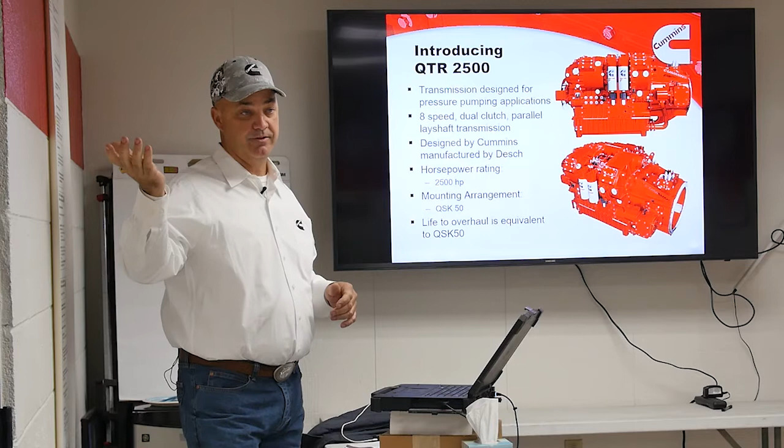They've also built a rebuild center in Dallas, right across the street from our rebuild center. So as we get more of these in the field and they come up for rebuild, they'll be rebuilt right there in Dallas, just like our engines.

Right now it's rated for 2,500 horsepower, hence the name QTR2500. The mounting arrangement is designed right now to be mounted on the QSK50 only. We're working on mating it to MTU—we've got a lot of demand to put it on an MTU to replace some competitive transmissions. We're also working to get it onto a QSK60 at 3,000 horsepower. Life to overhaul is equivalent to the engine for this transmission.

So some features of the transmission: first, there's an external disc brake. Some transmissions have an internal brake—if you have a brake issue, you've got to disassemble the transmission to fix it. Ours is external, so it's easily serviceable. The brake is not there to bring the transmission and the engine to a halt.

It's there to hold the pump. The brake will not hold the engine. If you put the transmission into gear with the brake on, it'll turn right through that brake and smoke it. The way the controls are set, if you go to put it in gear, it releases the brake, but if there was a problem, the brake won't hold it. It's just there—it's a parking brake, like the hand brake in your car.

Another feature is a barring device on the back of the transmission, similar to the barring device on our engines. It's there to turn the transmission only—it won't turn the engine, it'll only turn the output shaft of the transmission. That's for the pump guys, so when they need to service their pump, they can rotate that barring device to turn the pump for valves and seats, rather than using a big pry bar in the driveline like they have been.

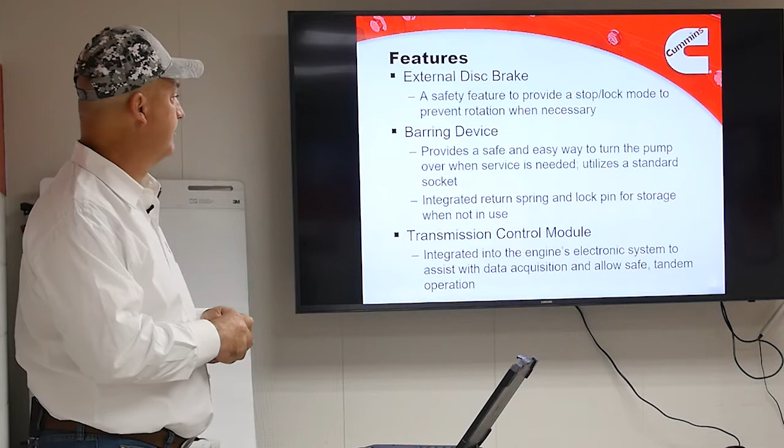And it's just like the one on the engine—it's got the little locking pin. You pull the pin out, shove it in, turn it, and pop it out to disengage it.

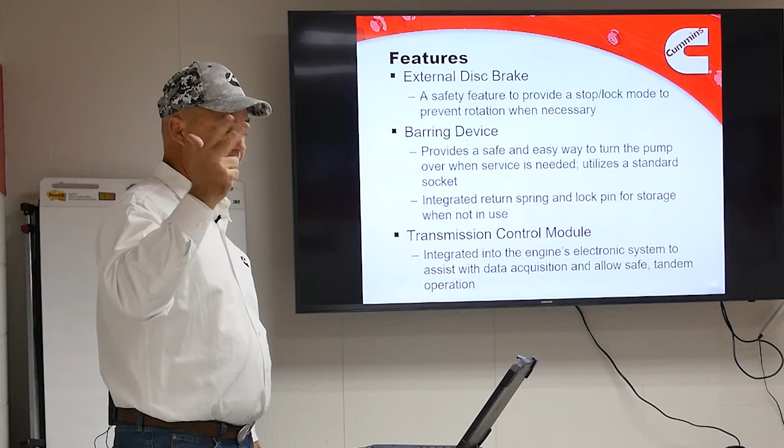The transmission has its own control module. That control module does talk to the engine over the J1939 data link, but it's its own independent device. It takes inputs from the frac rig for desired gear and desired throttle, and it talks to the engine ECM, telling it how much throttle it wants, and the engine throttles according to that.

Data on it: 2,500 horsepower. There are 8 forward gears in the transmission plus a test of pressure system gear. There's no reverse in the transmission, only forward gears. It has the same warranty as the engine: 2 years, 2,000 hours, unlimited in the first year.

It's a dual clutch transmission, no torque converter. It's a manual transmission, manual gearbox, but it's all shifted automatically. The transmission weighs about 7,300 pounds, and it uses the same oil as the engine does, so same fluid—you don't have to have a separate fluid for it.

Gears, gear ratios—put that up there just to show the tops. We'll talk a lot more about tops as we get on, but notice all the forward gears have a real nice even split, real close ratios, so we can shift gears under power and keep the engine in its torque curve, with real smooth even shifts. And then the tops gear is a very, very low gear, and we'll talk more about what it does in a minute.

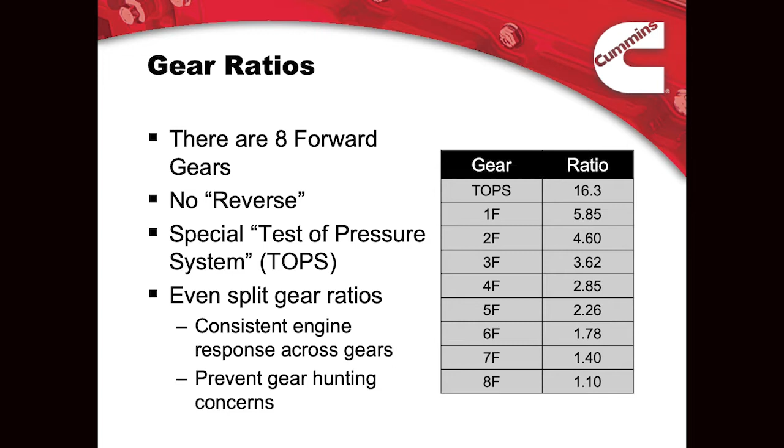Transmission data plate: there's 3 locations on the transmission where the data plate could be, because we like to keep things interesting. The original idea was to put it up there, then they decided to put it back there, and finally on the back. So that back position is where you should see most of them, but on some of the earlier ones you'll see it up there on the front.

The transmission data plate—on the early versions it's the Desch data plate, on the later versions it's a Cummins data plate, but it's got the transmission serial number. The transmission serial number is just like any other Cummins serial number: it's an 8-digit number, but it starts with 009 and then everything else. So it's a DBU serial number.

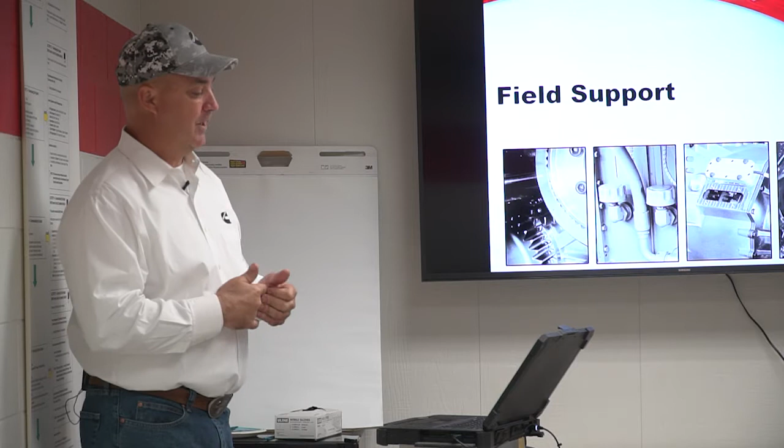Okay, we'll talk about field support. There's a lot of money tied up in development of this transmission, and this is very high on the radar from upper management. This project will succeed, it has to succeed. And in order for it to succeed, the one thing we need is help out in the field. We need you guys out there.

It was easy at first when we had one out in the field for me and my team to go out and support, or the engineering guys, but now that we've got more, it's too much, so we need more guys. The purpose of today is—this is not a full-on certification; you're not going to be a certified transmission technician at the end of the day. I'm just going to try to give you guys enough knowledge so you can plug into it with your computer, communicate with it, read fault codes, see operating parameters on the laptop, and know what the transmission is trying to do, what it's telling you.

And then also basic troubleshooting, so you know where sensors are, you know where pressure valves are, and you can change parts and pieces if you need to. And then also if you're out troubleshooting them, you know what to look for. So if we ask you, hey, you need to go look for this pressure relief valve, you've got an idea where it is, and you can feed back information to us so we can remotely help you keep them going.

For right now, the only repairs that are going to be made to the transmission are external repairs—so oil leaks, failed sensors, failed valves, stuff like that. If we have a part break inside the transmission, inside the gearbox, we're going to swap the whole transmission. We've got 100 of them sitting in Arlington. We've got plenty of spares.

The only exception right now for this is the clutch, and we are going to start doing clutch work in the field.

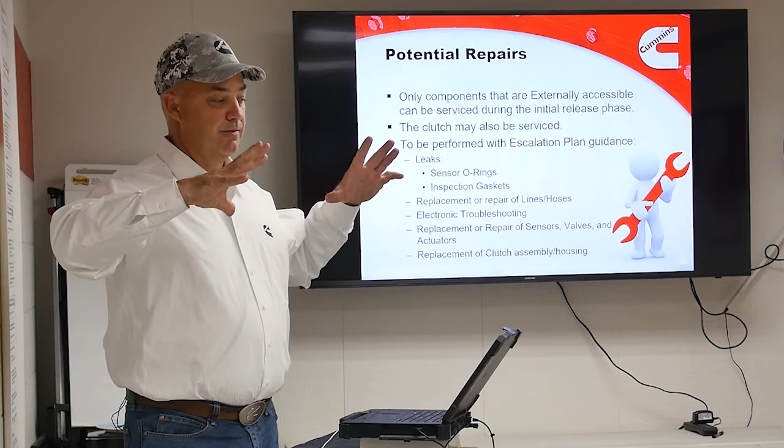It's too much of a job to do out on location, so when we say field, we mean a shop. If we have a clutch failure, we'll bring it to a shop like this, pull the transmission out, and change the clutch. We'll either change just the clutch assembly itself or the entire clutch housing, depending on what's quicker, easier, and what it needs.

There are no special tools needed to work on it until we get into the clutch. The only thing is pressure gauges to check hydraulic pressure in the transmission. The oil pressure in the transmission is 500 to 600 psi, so you don't want to use your PB350 or a 0 to 100 psi gauge. We need higher pressure gauges, but we'll talk about that later.

Parts are in stock here in Odessa—oil filters, O-rings, breathers, position sensors, all that stuff we have in Odessa. I have a parts list made up and I'll email that to you guys. So everything we can change, we have in stock, and it'll have a part number and description for you.

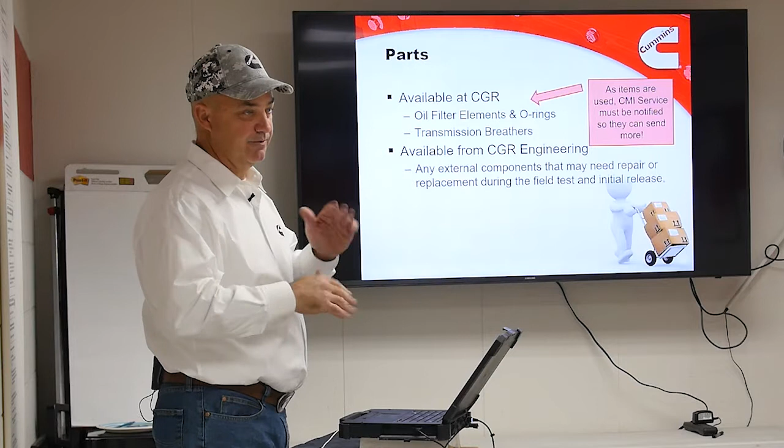It's not on QuickServe yet, it's being put on QuickServe. But since it's such a small number of parts, it's really easy to keep track of. Any parts that you change, we need to know about it and we need the parts back. It's all infant care stuff, so even if there's a cut O-ring, we're probably going to want that O-ring back to try to figure out what happened to it.

On QuickServe Online there's a maintenance, troubleshooting, and repair manual, and there are wiring diagrams—we'll talk about how to get to that later. For electronic service tools, this is the PuTTY software on your laptop. Before you guys leave today, we'll get all your laptops set up, you'll plug into that transmission and go through everything, and I'll show you how it works.

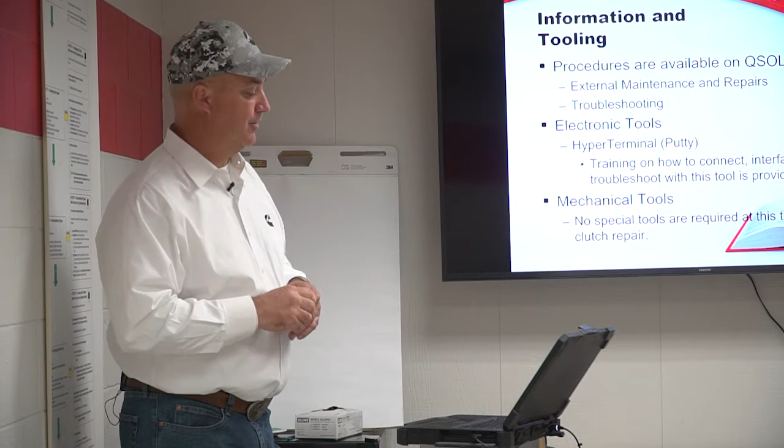There's a communication cable that's needed, part number W0271. You guys have two of them here in Odessa. Waylon keeps them in his office, so if you need to go work on a transmission, you have to get that from him.

Calibrations are done through a different program, and for right now we're going to leave that till later. We're not going to do any calibrations in the field yet.

All right, now we'll start getting into the parts and pieces. Transmission housings: the gearbox is made up of four housings bolted together externally, with lots of bolts—hundreds of bolts. When we go out there and look at it, there's an incredible amount of bolts holding this thing together. All the housings and seals are sealed with anaerobic sealant and O-rings for oil passages. There are no gaskets—the only gasket on this transmission is the oil pan gasket.

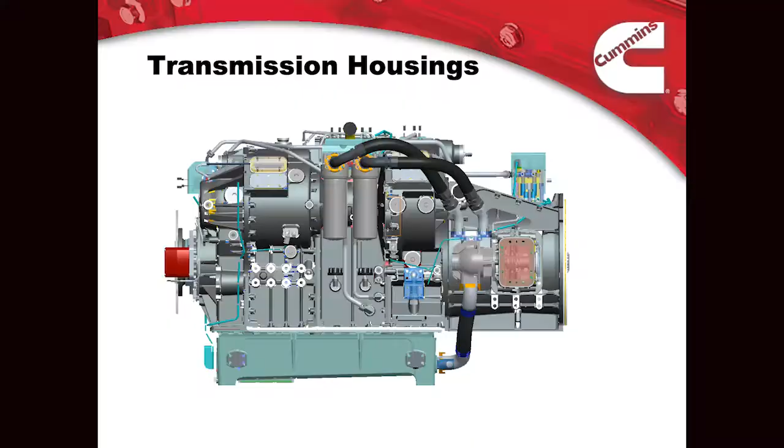The clutch housing is a separate housing that bolts on the front. As the name implies, that's where the clutch lives, but there are also two PTOs that drive out of the clutch housing. Terminology for all this stuff still isn't decided, so right now we're going by the drawing numbers—the clutch housing is H99. So if you talk to engineering and they're trying to get you to look at something, they're going to tell you to look at the H99 housing. That's the clutch housing.

The next housing going back from that is the tops housing. Going back from that is the filter housing, H72. The next one back is H73, the fill housing—that's where the oil fill cap is up on top, hence the name fill housing. And then the back housing is the output housing.

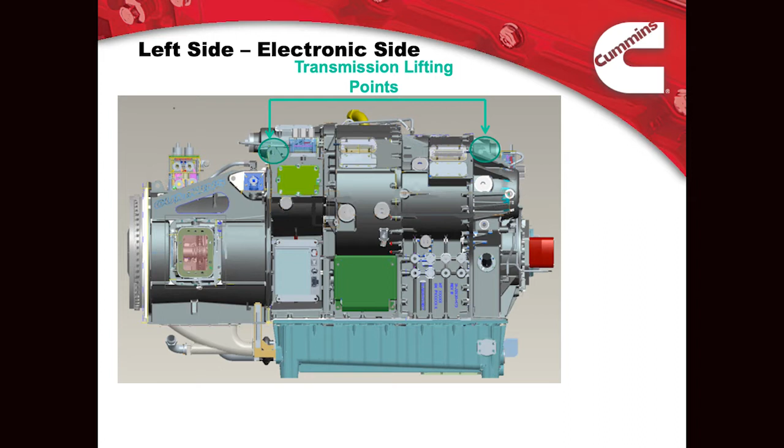Okay, looking at the left side of the transmission: there are four lifting points on the transmission, two on each side, and you can use the same fixture that you use for the QSK50s and 60s—it'll clamp right onto this thing and pick it up. For mounting locations, there's one on each side. This is where the cradle that supports the transmission bolts to the transmission, and from there it bolts down to the frame of the rig.

Sight glass: there's no dipstick on the oil pan, there's a sight glass instead. The sight glass has four different locations, one on each corner of the oil pan. Our standard is on the left side rear, but depending on the customer, they might move it around to make it more accessible. The transmission control module, TCM, is mounted on the left side.

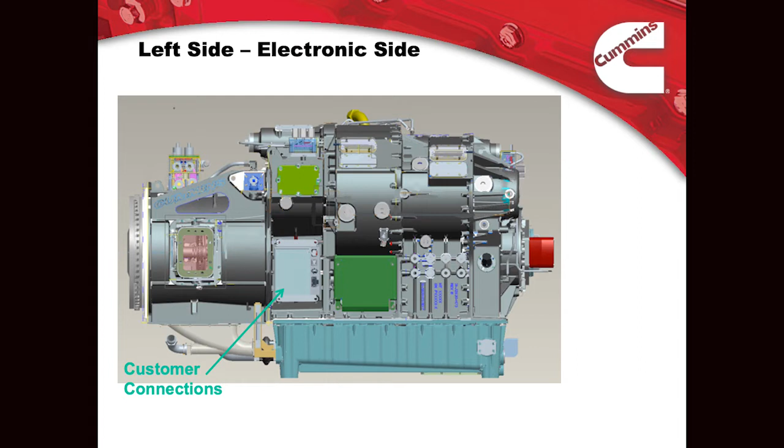And then the customer connections. This is where the customer lands their power and communication and everything else, and this is also where you will connect your laptop. Both of these are pretty easy to get to on every application I've seen so far, other than one up in Canada. You don't have to worry about that.

Okay, back side of the transmission. The only thing back there really worth talking about is the brake. It is a twin disc, or twin caliper disc brake right now. They are looking into going with a single caliper.

There's the barring device on the right bank side of the transmission. The oil drain plug is on the bottom of the pan at the rear. And then there's 2 oil heaters. Those come standard in the transmission, every transmission has them. We don't connect them, the OEM connects them, and those connect to the engine coolant.

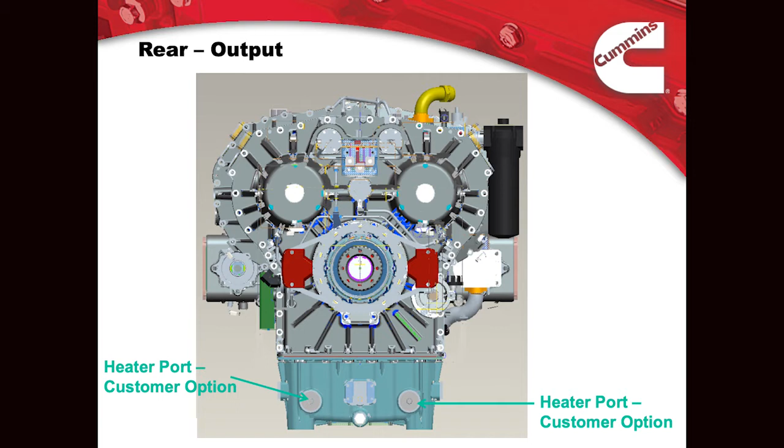Okay, the right-hand side, customer oil connections. So oil out of the transmission to the cooler comes out of that big pipe at the top, goes through the cooler, and returns to the clutch housing and dumps at the pan up there in the front.

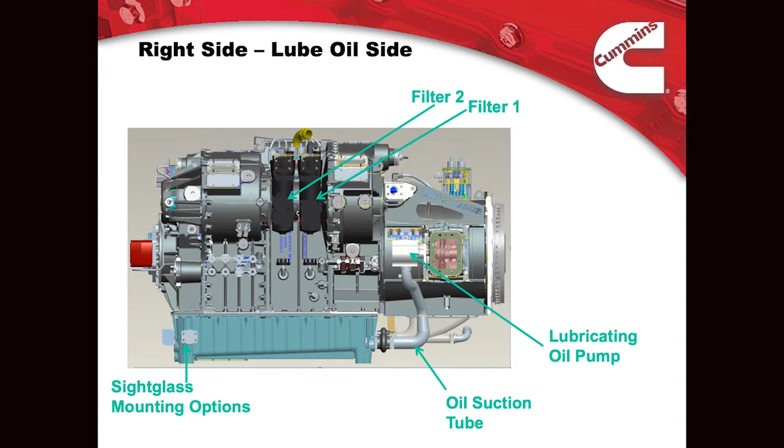Oil filters. It's got 2 oil filters. These filters are high pressure, so they are gear pump pressure, 500 to 600 psi in those filters. So special care when you change filters, and obviously you don't want to try to take one off while it's running.

2 breathers on the right side of the transmission, right below the oil filters. These are a serviceable item, we have them in stock. And then the mounting feet on that side.

Okay, and then looking at it from the front, there's 2 power takeoffs. The power takeoff on the left side is the customer mounting PTO. That's where the customer will mount their hydraulic pump to drive their fans or whatever they need to on the unit. And on the right hand side is where our oil pump is. Each PTO is capable of 150 horsepower load, so they can pull a full 150 horsepower off the left side. We're pulling 50 for our pump, so they've only got 100 horsepower left on the right hand side.

The pumps mount onto the PTO. It's a dry mount, so it's not a lubricated spline. There's no gasket, there's nothing in there, and we have seen some indications of wear on some of the early ones. So that might be something we're asking you guys to do on some of these first few, is to go out and pull those pumps back, grease the splines, put them back on. We'll talk about that when we get out there. The pump is light, it's real easy to get off, it's not a horrible job. And then the input shaft goes into the flywheel.

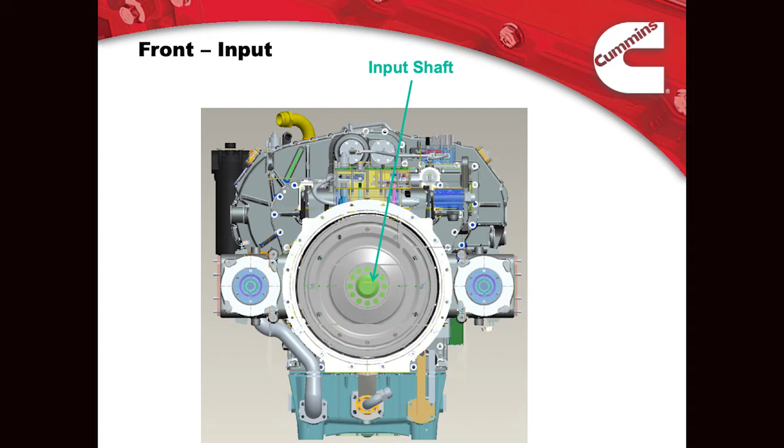Okay, manifolds, let's talk about the manifolds. This is a hydraulic manifold. This is where all the oil gets distributed in the transmission, through the transmission. All the actuators, everything happens through all these manifolds. There's 8 of them. We'll go over them real quick on here, and then we'll go look at them out on the transmission in a bit.

So the first one is the clutch manifold. It lives up on the clutch housing, bolts right up on the top of the clutch housing. All the valves on it - there's 2 valves, the 1 and 2 there, that's clutch cooling. Big valves, high volume of oil, so we push a lot of oil through the clutch when we're engaging it to try to keep it cool. It's going to get really hot really quick, so we'll pour a lot of oil through there.

Clutch pressure, clutch 1, clutch 1A and 1B - this is the actual clutch engagement pressure. The clutch is actuated hydraulically, so this is the oil pressure that's actually engaging the clutch. So if one of those pressure sensors fails, you will get a fault code for it, but it will continue to operate because it's got the other sensor.

Dump valves. So we actuate the clutch with oil, the oil stays in the clutch to keep it actuated. When we want to release the clutch, we need to release it really fast - we don't want it to drag, we don't want it to slip. So that's what those dump valves do, they open up and pour the oil, and it drops right straight back into the sump. Clutch pressure sensors, I already talked about, those are redundant. And then these are the actual actuators - these are what turn on to pour oil to the clutch to engage it. Okay, the next one is the lubricating oil filter manifold.

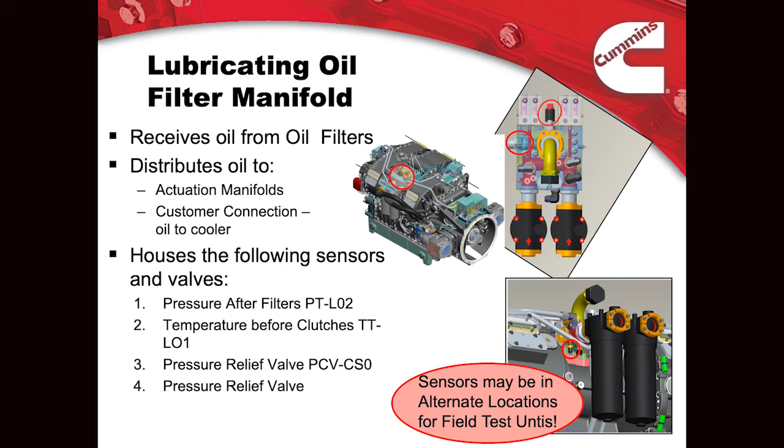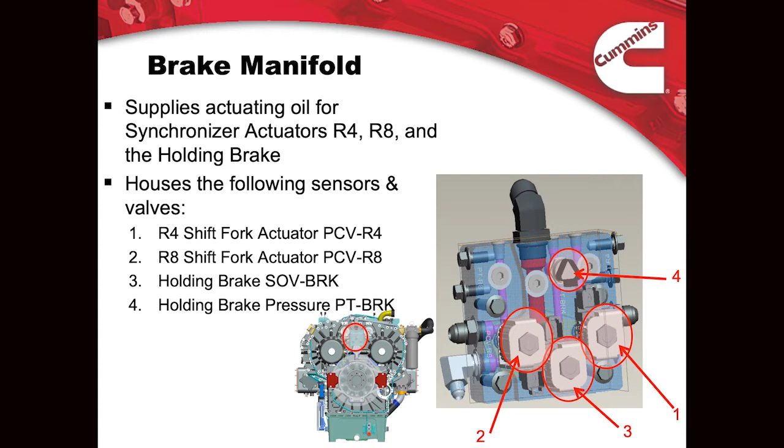Brake manifold goes on the back right above the brake. It's got 2 more shift fork actuators, and then it's also got, it controls the oil to the brake. Tops manifold sets on top of the tops housing. 2 more shift fork actuators, and then the tops shift fork actuator.

Lubricating oil pump manifold, it sets on top of the oil pump. Pretty much the only reason that's there is the oil pump has 1 single outlet. This manifold divides that up into 2 outlets, a hose connected to each one going to each filter.

Relief manifold. So this is where the oil comes out of the cooler, the customer transmission oil cooler, dumps back into the transmission.

Okay, oil pan. Again, bolts up to the bottom. It has a gasket, pretty much the only gasket in there. And it's got 2 heaters in it. Every transmission's got those heaters. And there's also a lubricating oil temperature and level sensor on the back of the oil pan towards the bottom.

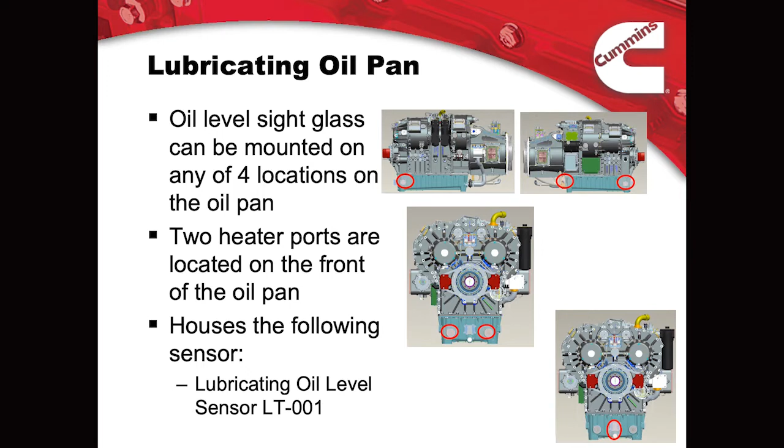We look at oil pressure. We log a lot of faults for our oil temperature. We'll talk about that. We'll look at that on the computer. And also oil level. It is an actual 80, 90, 50, whatever percent oil is what it's showing. And it will shut it down for oil level.

Talk about some of the sensors, speed sensors. On the right side of the transmission towards the rear, that's output shaft speed. The right hand side of the transmission to the front, that's the right hand shaft speed. The other side of the transmission is the left hand shaft. There's 3 shafts in the transmission. We'll talk about that later.

And then pressure sensors and temperature sensors up on the header. Some of these sensors will move around a little bit from early transmissions on into production. So what you run into in the field may not be exactly like this, but the harnesses are marked really well, and all the manifolds are stamped really well. Everything that goes is stamped in there. So it's pretty easy to trace.

Shift fork position sensors. So there's 5 shift fork position sensors. We're going to spend a lot of time talking about these. We have had some problems with these. And there's some confusion as to where they go and what they do.

So the right-hand side of the transmission, the shift fork position sensor at the front is R1, R2, and that is the shift fork and the synchronizer. So when we refer to a synchronizer or a shift fork, it's R1 or R2, 3, 4, 5, 6, 7, and 8. 3 and 4 are on the rear, 5, 6, 7, 8 are on the other side, and they're all 3, 4, 5, 6, 7, 8 are all front to back. 1 and 2 is backwards. So 1 is the back and 2 is the front. So that can be confusing. It'll make more sense when we look at it on the computer.

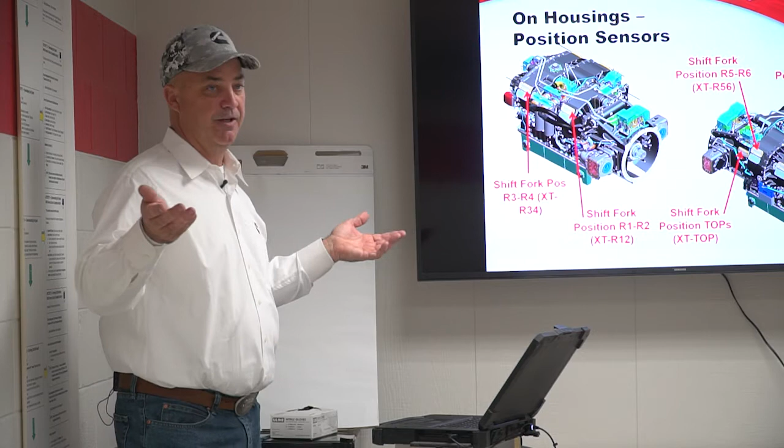The right-hand side of the transmission, when the shift forks are to the back, that'll read minus. If they're all the way to the back, they'll read minus 100. All the way to the front, positive 100. It'll be the opposite on the other side. There is a little bit of over travel, so when we engage the shift forks, they push all the way to the back to 100, and then they'll relax a little bit. And their actual holding position will be 97 or minus 97.

So when you look at it on the computer, that's what you want to see: minus 97 or 97, depending on where it is. And if it's not there, that's telling you something. We'll talk more about that later on. You can calibrate them, you can move them around, and tear a lot of things up if you're not careful. So we'll cover that a lot. That's the one thing about this.

When we talk more about the putty and the programming, it's not like INSITE where it's designed so you can't tear things up. You can tear this transmission up with putty if you go to the wrong screen and do the wrong thing. So I will spend a lot of time telling you what not to do as well as what you can do. So what we'll do now is we'll hop up, we'll run out there and take a walk around the transmission.

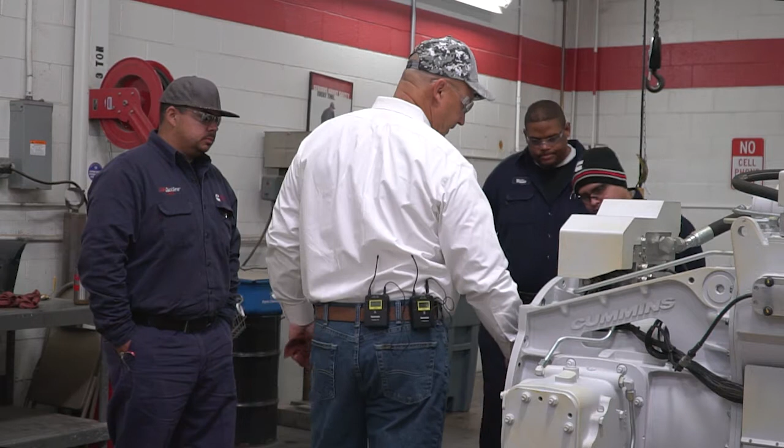We'll talk about all the things that we've looked at so far. So obviously on the input side, there's a coupler, a Geislinger coupler, which is pretty much the same that everybody else is using, the same that the competitive transmissions use. That bolts to the flywheel housing, and we simply just spline into that. Nothing at all tricky about it.

It is a wet housing, so there's an O-ring goes around here. All the oil from the cooler, the clutches, and everything else dumps into here and then drains back to the sump. So there's a lot going on in here. There's a lot of oil.

This is the input shaft here, connected to the crankshaft of the engine. Inside, this is the PTO drive gear, and there's a PTO idler gear on either side driving the outside PTOs, and then the clutch is further on in the back, both clutch packs.

So again, this is the H99 housing from here back. So this is a serviceable part. These bolts right here, you bolt all of that, swing this thing right off. There's a plate right here, cover plate.

This is where you go in to do clutch inspections. And this is part of the normal procedure that we'll probably be asking you guys to do on some of these. We're gonna be looking for signs of heat, signs of the clutch burning, and then we actually measure the gap in between clutch plates.

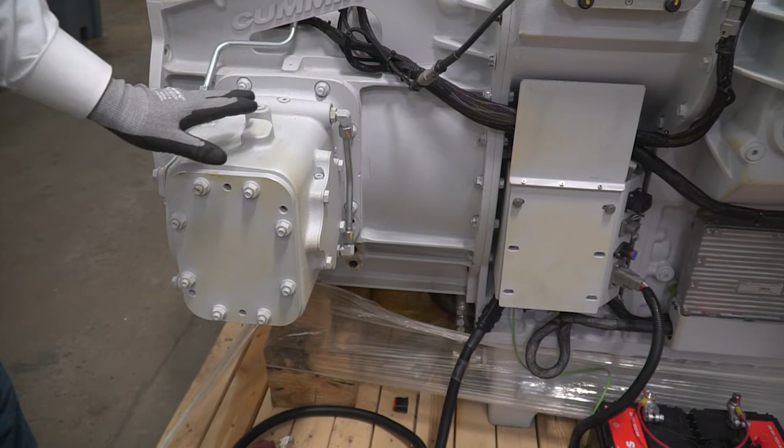This is the customer PTO pod. This is a PTO pod that the customer will connect their lube pumps to, or anything else that they need to drive off of it.

On the left side of the transmission, this is the customer connection point. Customer power and inputs for gear selection. Throttle comes into this bottom. There is a ground that connects to the inside, and then our service diagnostic tool connects into the harness right there.

J1939, you can plug into here, you can talk to the engine from here, you can talk to the transmission if we had that software. And then right behind that is the TCM, that's the transmission control module, the brains of the outfit right there.

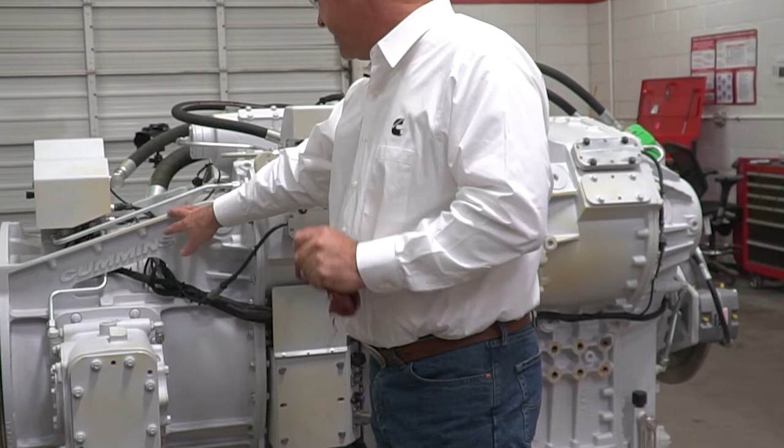So H99 clutch housing, H71 tops housing. The tops gear is in here. This is the tops position sensor. H72 housing, oil housing, filter housing.

This is R5, R6, shift fork position sensor. And there's an inspection plate here. You can pop this up and you can see the synchronizer in there.

This is something else that we will ask you guys to do at some point along the way for troubleshooting and also just for wear analysis as we see where we're going. R7, R8 shift fork position. The output shaft.

Are twin brake calipers. Brake manifold right here. There's the fill housing where they put the oil in. There's your oil level. The barring tool that we talked about right there. Pop that pin out, put it in there, turn it, just exactly like the engine barring tool.

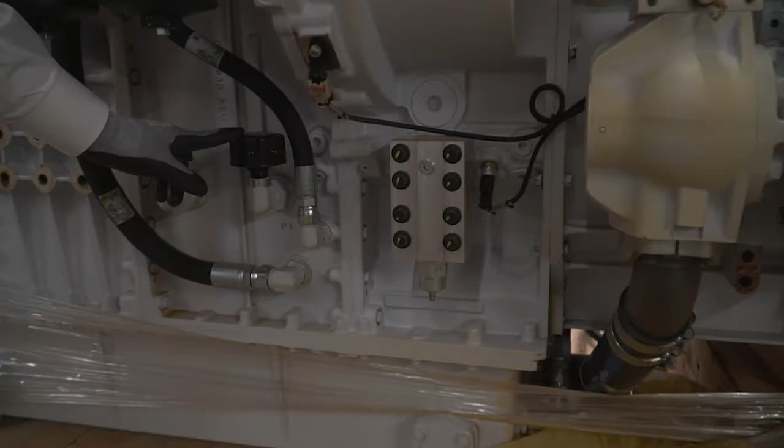R3, R4 shift fork position sensor. Output shaft speed sensor. Oil filters. Crankcase transmission breathers. R1, R2 shift fork position sensor.

This one is reversed, it reads back to front. All the other ones are front to back. So 1, 2, 3, 4, 5, 6, 7, 8. This is oil out to the transmission oil cooler. Oil goes through the cooler, returns back to the transmission through this fitting, dumps to the oil pan.

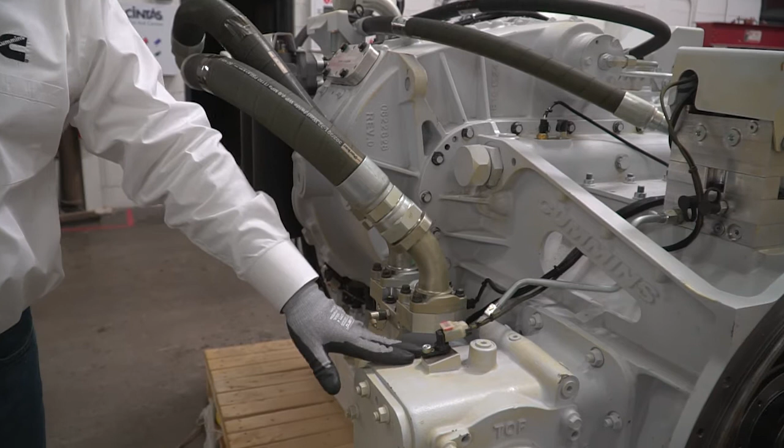This is our lube pump. It's driven off the right side PTO pod. This provides hydraulic pressure and lube oil pressure to the transmission. If there's a failure in here, we do stock these, you can just change this. Don't foresee anything happening there.

But again, this spline in here, it is a dry spline. We have seen problems with that. So there is a grease that we've identified that we're going to put on there, and we may need every couple of thousand hours to pull this pump off and grease that spline up.

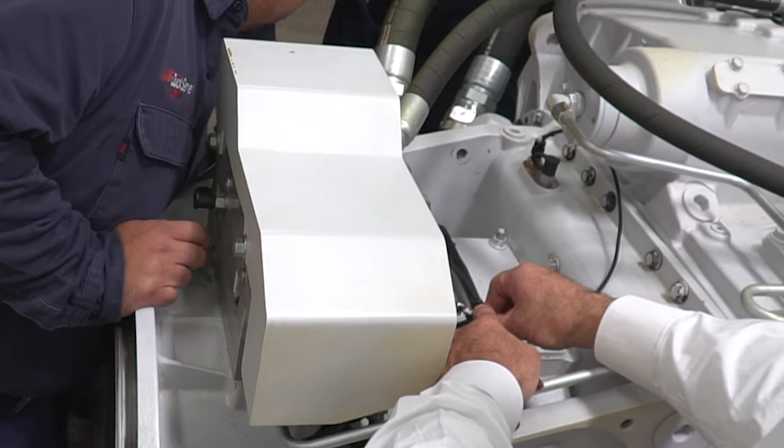These steel lines across the top, these are all your actuators. So this is the oil that's pushing the piston to drive a shift fork actuator in and out. Everything's done hydraulically. All the harnesses, every connector is marked. It's a good steel plate that's easy to read. Depending on who puts it together, it may or may not get painted over. If they mask them off, it's a real easy way to find it.

So we're going to look inside. We're going to talk a lot more about what's going on in what gear, where shift forks are, all that good stuff as we're going through gears.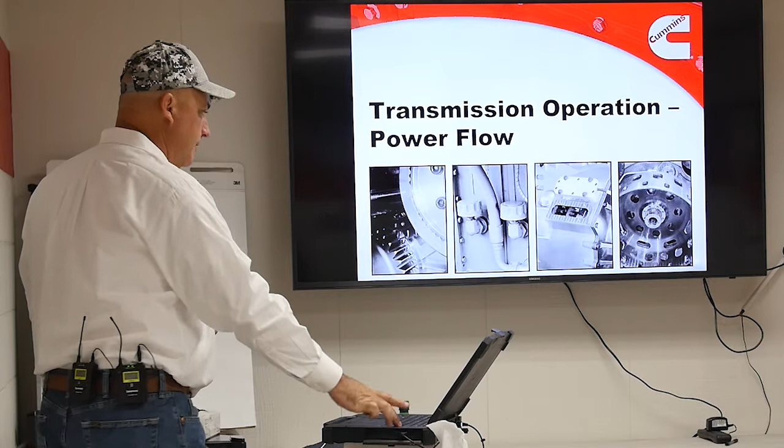And the other thing I got is this video. I took this video in a test cell with a customer a couple years back. I threw this in there just to give you a sense of what this thing sounds like. There's a lot of gear whine with this transmission. That's normal.

And also to see what it's like when it shifts. So this is a gear shift going from second gear to third gear with about 10,000 psi against the pump. If you've ever paid attention on a frac pad, you'll see some of these competitive engines, you can tell when they shift gears, you can hear the clunking and the banging, and you can see the trailer rocking back and forth. All that clunking, all that banging is hard on drive lines, it's hard on pumps.

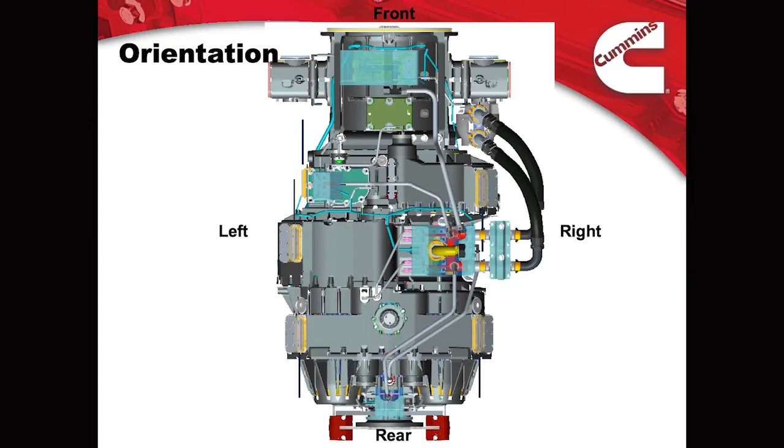So orientation, when we talk about the transmission, it's exactly the same as the way we talk about engines. If you're standing at the back of it, on the output side of the transmission, left is left, right is right, left bank, right bank, just exactly like the engine. And that's how I'll refer to everything, as left bank or right bank, because that's how I was raised and that's what makes sense to me.

Shafts - so it is a dual shaft transmission. There is one common shaft through the bottom, that's the input and the output, and then there's a lay shaft on either side of that. The input shaft receives the torque of the engine through a Geislinger coupling, we just saw that. It goes through the transmission, through the gears, comes out the backside, and powers the load.

Lay shafts - so parallel lay shafts, one on each side of the transmission. The left bank side of the transmission is the odd gears. The right bank side of the transmission is the even gears. The shafts aren't really one shaft all the way through, it's really two shafts split in the middle. On the left side, the odd gear side, it's split in the middle, and there's a bearing supporting the front of that one and the back of that one.

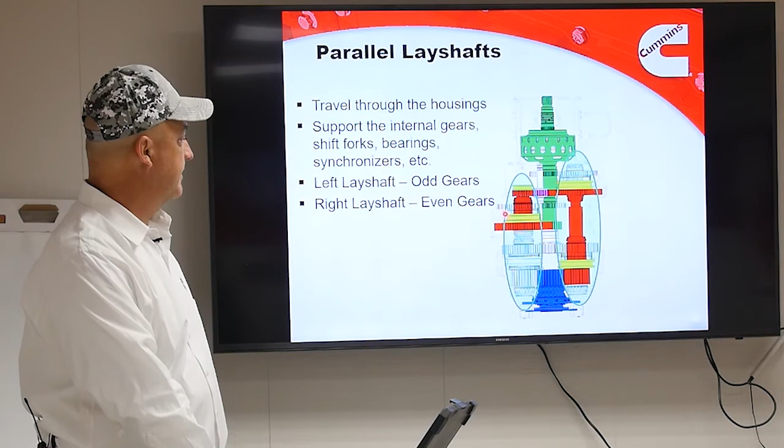This shaft is not connected internally. The only thing that connects this shaft is all the gears. The right bank side is split just like the other one is. The rear shaft is a hollow tube with splines on the inside, and the front shaft has splines on the outside, and the splines are inside of each other. So they are mechanically splined together. And all that will make more sense as we get further into this.

Dual clutch - you'll hear that a lot, dual clutch transmission. There's two clutches, referred to as K1 and K2. K1 is the big clutch drum that you see on the outside there. K1 drives the right bank side, K1 drives the even gears. K2 is the smaller clutch on the inside. K2 drives the left side, K2 drives the odd gears. So when we shift from an odd gear to an even gear, first gear to second gear, there's no gear changing that goes on. All we're doing is switching from K2 clutch to K1 clutch.

And it's an instantaneous change. Release one right as the other one grabs, so that's why you don't see the rocking and the banging. You saw that nice smooth shift, and it happens in half a second.

This is the same concept. I don't know if any of you guys watch Formula One racing, real fast paddle guys, that's the same concept. Or some of your newer passenger cars, Audis and Volkswagens, the DSG transmission.

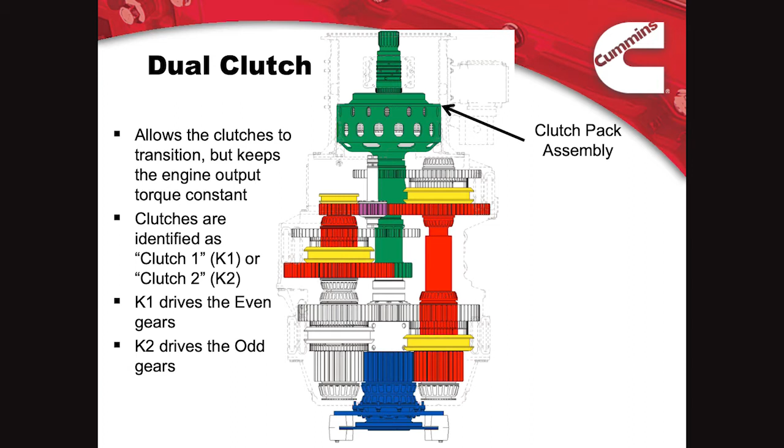It's the same design. The only difference is with them, they're pre-selecting gears up and down. They're looking at throttle, they're looking at everything, trying to figure out, you're in third, you're going to go to fourth, you want to go back to second. Whereas if we're in first, we're going to second next, right? We're not going to skip up, we're not going to go around. Everything is 1, 2, 3, 4, 4, 3, 2, 1.

So looking at the clutch with the housing off, the clutch drum, the big drum on the outside, that's your K1 clutch. The K2 clutch is inside on those splines. The clutch sitting out on the floor, same thing — the big one, that's K1, the smaller one, that's K2.

And then looking at it through that inspection window that I showed you guys on the front, this is the K1 clutch right here, so those are the K1 clutch discs. Looking through that hole into the K2 is the K2 clutch disc, and that's what they look like looking through the hole right there.

We'll go out and pull that cover off and look at it, because that's part of a maintenance procedure — to measure this gap in between these clutch discs. There's a specification, and we have a tool to do that. Shift fork synchronizers.

So this is when we talk about R1, R2, R3, R4. This is what we're talking about.

Looking through the little inspection window on the side of the transmission, this is the synchronizer inside of it. This bronze pad right here is what rides on this clutch fork or shift fork, and that rides right inside this ring, and that pushes this synchronizer ring up onto this spline or down onto this spline to engage that gear.

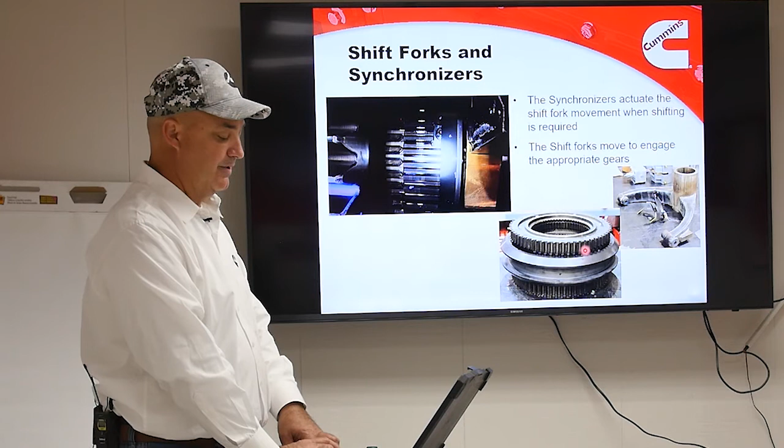So we'll start talking about what's going on when we're going into a gear. These drawings are really only half accurate, and the reason they're drawn like this is because it's showing us what this side is doing while we're going into first gear. It's not showing us what this side's doing when we're in first gear, because it's going to be different whether we're coming back into first from second, or if we were in third gear coming from fourth — that's going to be a different spot. I'll try to walk you through it without confusing it much more, but for right now we'll just look at it as it's drawn, and I'll explain more later.

So for first gear, both the shift forks are going to be to the rear. Actuators are going to push both shift forks to the rear, to the 97 position. We're going to engage K2 clutch, and that's first gear. So looking at it from the inside, this is R5, this is R6 gears — that's your first gear, that's fifth gear. There's your shift fork to the back.

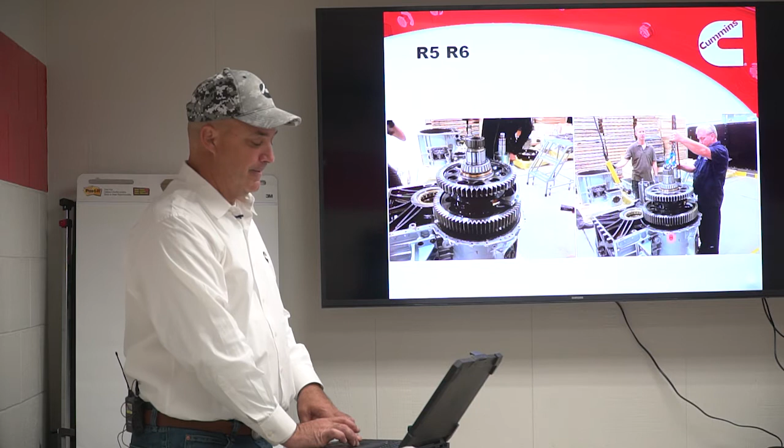And then when they come out of the transmission, you just hook a hoist onto them and they lift right straight out. They're just setting in there on bearings. Also just kind of notice as we go through this, the size of these gears — that's why this thing weighs 7,500 pounds. This is one of the reasons why we're not too worried about making internal repairs. This thing ain't gonna break.

So second gear — we're gonna shift from first gear to second gear. Really nothing is going to change in the transmission.

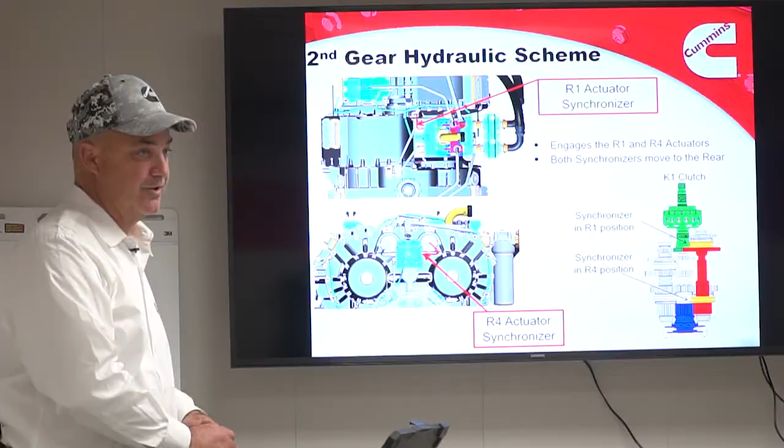Shift forks are going to be at the back. And then all we're going to do is switch from the K2 clutch to the K1 clutch, so we'll drive this other side. So first gear to second gear is nothing but a clutch swap. Nothing else happens in the transmission.

When you start the transmission up and it builds hydraulic pressure, the transmission goes to what it calls a home position. The home position is all 4 shift fork sensors to the back, ready for first gear. And the clutches are released, so this is neutral. So when you command neutral, and it says it's in neutral, the transmission is actually in a gear, but the clutches are just released. We don't really have a neutral position, we don't shift the transmission anywhere to neutral. We just release the clutch. And that's kind of important to remember, that home position.

So when we first started up, all 4 are going to move to the back, and that's first gear, ready for first gear. So these are to the back, and these will be to the back, and then both clutches are released. So then we'll energize the K2 clutch, which drives the left shaft, so that'll put the power through the left shaft. That's first gear. And then when we want to go to second gear, all it does is release the K2 clutch and engage the K1 clutch, literally almost at the same time, in the same instant. It just changes over from one to the other.

So when we go to third gear, it's going to start off in first gear, go through first gear, go through second gear, and then when it's in second gear, it's going to start to pre-select third gear. This is the R1 and R2 gear set - that's the R1 gear, that's the R2 gear set. You can see everything's splined or meshed. All these gears are always meshed together all the time.

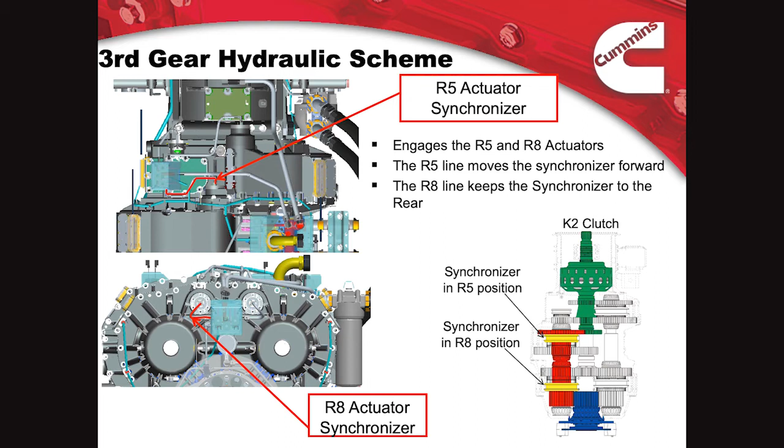So to go to third gear, we just went to the K2 clutch. We moved R5 to the forward position, then we engaged the K2 clutch. So all we do to go to fourth gear is now we want to drive the other side. We're going to move R1, R2 forward into the R2 position. So now it would be reading 97 if you're looking at it on putty. And then we're going to release K2 and engage K1.

So first through fourth gear: first gear, all the shift fork position sensors are back. Second gear, they're all back. Third gear, R5, R6 moves forward. Fourth gear, R1, R2 moves forward. And then it's just clutch swaps back and forth. This is pretty much everybody, that's what they're going to run through, first through fourth gear. I don't think anybody ever uses the gears higher than that, other than sometimes maybe when they're clearing out pipe.

So now to go to fifth gear, on this shift we're moving two shift forks. We're moving R5 and R6, which was up in R5, back to R6. And R7 and R8, which was back in R8, we're moving up to R7. So that takes a little bit longer, a lot more oil, a lot more stuff to move around, plus we're synchronizing two different gear sets. So this is a longer shift. Fourth to fifth is a longer shift than any of the other ones as well.

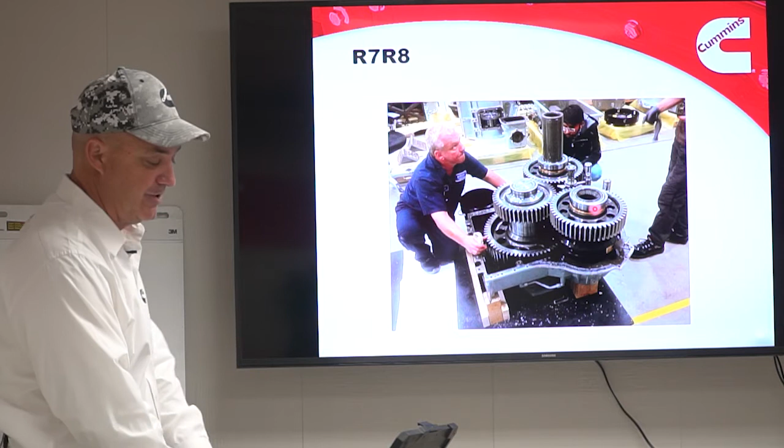And then the gears in the back, so R7 and R8 gears back there, shift fork position, the output shaft. And then you can see on the other side that tube, that shaft, the other one couples inside of it. Or these two shafts, the one that would go up here, they're not mated together, it's just a bearing right there. But again, big, beefy stuff.

6th gear is the same as 5th gear. We're just going back to the other side now. We're moving both shift fork positions, we're swapping clutches. Same thing on the other side.

Again, you'll notice all the gears are all meshed all the time. Shift forks right here. And then this right here, these are spray bars. Every gear's got one, two, three, or four spray bars, just like a piston cooling nozzle. All those gears, all those bearings, everything is flooded with oil all the time. It's a massive amount of oil that goes through this thing when it's running.

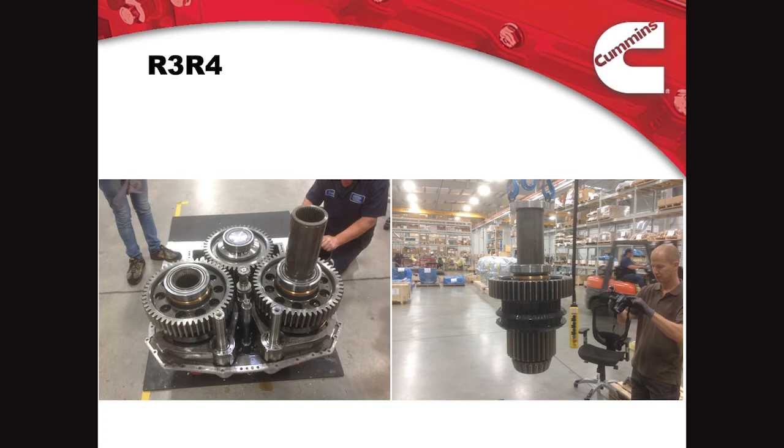7th gear, same thing, just popping back to the other side. But now we're just moving R5 back forward. So this would be a little bit faster shift than going into 5th gear was. And then the last one is 8th gear, same thing.

All right, so the next one is tops. We've talked a lot about tops, I've said tops 100 times, but I haven't told you what tops is. So tops is its own special gear. It's the gear that we use to pressurize the iron. So when they hook up all their stuff to the well, before they do anything, they always pressurize everything, make sure they don't have any leaks. And the normal procedure for that is that they want to pressurize, say, to 10,000 PSI.

The operator will put one transmission in gear and he'll wait until the pressure comes up. And then he'll go to neutral, like at 8,000 PSI. And then he'll go back into first gear and then back to neutral, and he'll neutral, first, bumping it until he gets up to whatever he wants, just 10,000 PSI. It takes a lot of time to do that. It's hard on the transmission, hard on the pump, hard on everything to do that. Neutral, first.

So what this does is this is an automatic pressure system. If they want to use this, the operator goes into his screen and finds the test to pressure screen. He selects that, inputs what he wants, say 10,000 PSI, and pushes start. Then the transmission does it all by itself. Using the K2 clutch, it engages this tops gear, this tops shift fork. And then it also puts R7 and R8 in neutral. So this is the only gear, the only time this transmission ever operates where any of these four shift forks are in a neutral position.

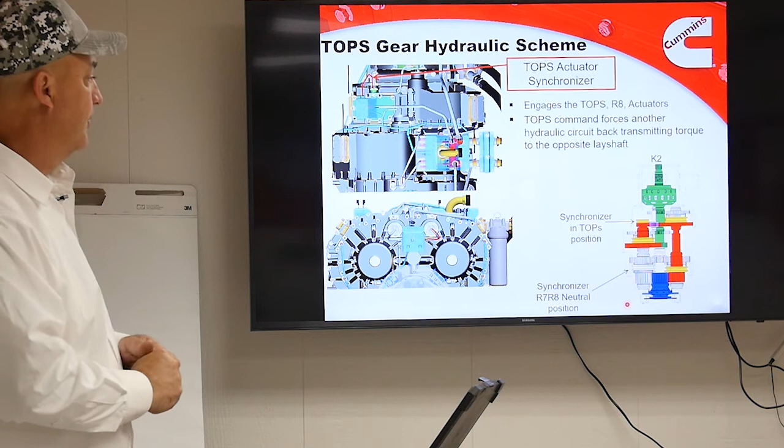So at that point, if you go out to one of these and they say it won't go into gear, and you plug your putty in and you see this R7, R8 is hanging out at 0 or 10 or 15, something like that, it's in neutral.

Probably what happened is they used the tops mode. Once they got done with the tops mode, for some reason that didn't go back into gear, so the transmission locked itself out. At that point, the only way you can get it to reset is to shut it down, power it down, and then start it back up. And when you start it back up, it'll drive everything back home.

I wanted to beat that one home. If you see R7, R8 in neutral position, that's probably what happened. It won't give a fault or anything like that, it just won't go into gear. Customer calls you, says it won't go into gear.

You can ask them, did you try to use tops? Yeah, we used the tops and it wouldn't go into gear. Okay, shut it off, start it back up, and it'll probably work.

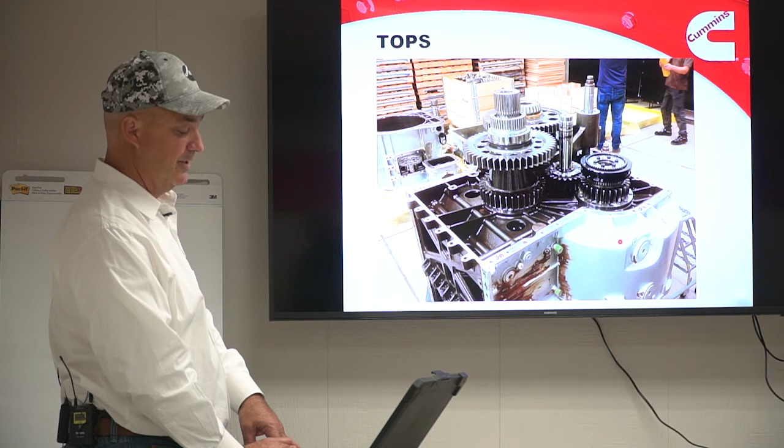So this is the top gear right here, drives it through an idler gear onto the other shaft. So when this is released, when this is in its neutral position, this is all just free spinning. And then when this engages, then it engages this gear through this idler, and then it drives this gear back in through here onto the other side.

That's where you get that 16-to-1 gear ratio. It's a really, really low ratio. When they do the test mode, the engine's at idle. They do it at idle, yeah.

We'll go over a little bit more of this in the operation part, but to enter the tops mode, the transmission has to be in neutral to start with. It won't go into tops if there's any output speed of the tail shaft. And normally we don't have any output tail shaft speed. A lot of your automatics, that output shaft's always turning unless you set the brake. This one, it won't. When it's in neutral, nothing's going to be turning out the back.

Once we get some wear on the clutches, the plates warp a little bit, we'll get a little bit of drag, and you might see some output shaft movement. So at that point, the tops won't engage.

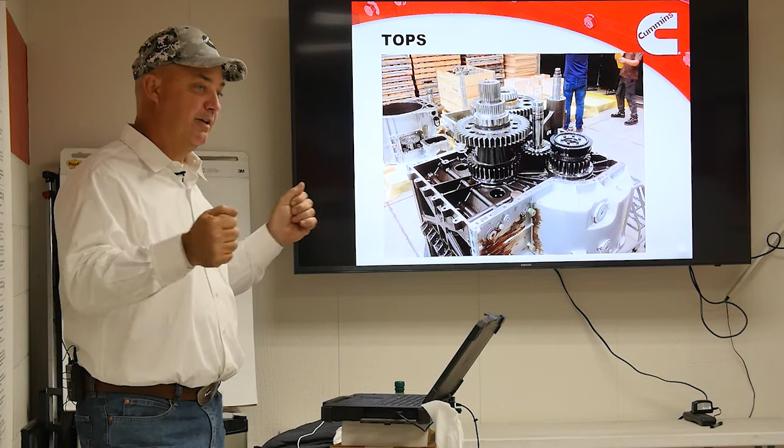So what we're trying to get everybody used to and all the controls is to go to neutral brake. For tops to work, they have to go to neutral brake first, set the brake, that stops everything from turning. Then it'll engage the tops, release the brake, and it all happens at idle. If they throttle it up, it's going to kick the transmission to neutral. It's all automatic. As soon as they push that test to pressure mode, they set their pressure, they push start, that's all they got to do. Everything else happens all by itself.

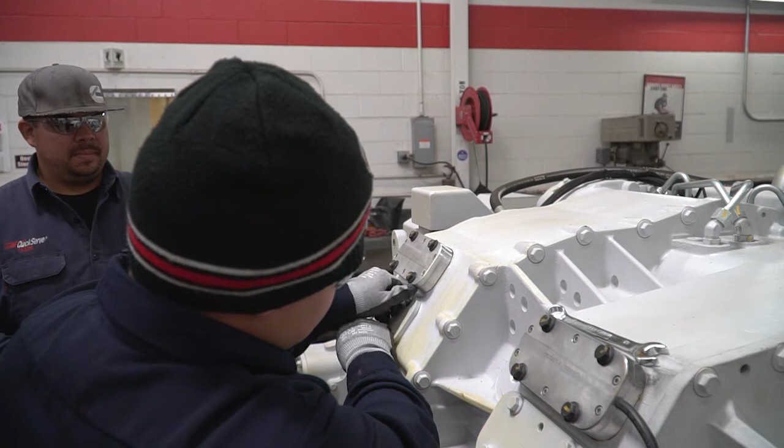All right guys, we're going to do a quick hands-on exercise. First pull the R5, R6 inspection plate off, then tell me what position that shift fork's in. Then we'll pull that sensor off, and then pull the clutch cover off and look at the clutch. So grab your wrenches, go to R5, R6, and pop that cover off.

That pops right off. That's a more or less reusable gasket, assuming you don't tear it up. Now if you look inside there, what position is that shift fork in right now? Yep, you're both right, it's at the rear. It's in the back. So that's 97, R5, R6 - that's in the R6 position right now.

Assuming that we engage the K2 clutch, and assuming this shift fork is also at the rear, that's first gear. Then we just swap to that side for second gear, move this shift fork up to here, and then engage the K2 clutch, and that's third gear.

That's what everything inside here should look like after it's got 10,000 hours. That's what it's going to look like. Things we might see are little clutch discs inside that synchronizer, and that's how it works - by smashing those clutch discs together and slowing everything down.

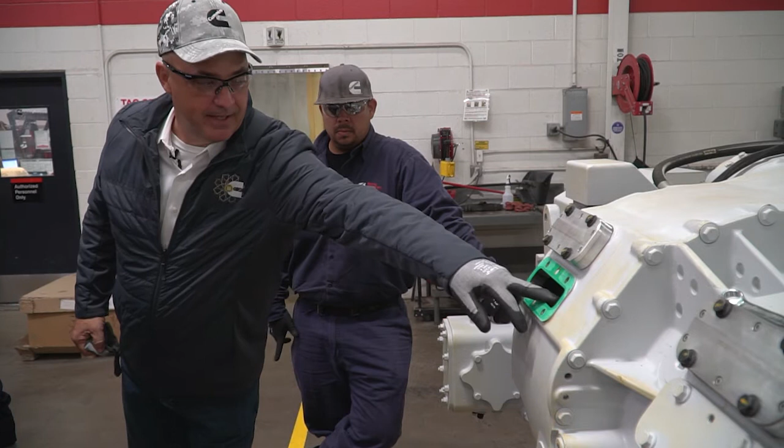If there's a problem with the shift fork holding that synchronizer up against the gear instead of being in the release position, it would overheat that, and you'd see signs of heat in there - they'd be turning blue and purple and all kinds of crazy colors like metal does when it gets hot. Same thing with that bronze pad right there - you'll see black, blue, all kinds of colors like that if it gets hot. That would be signs of a problem.

Okay, that's that. Go ahead, slap that back up. Just leave it kind of snug so the next guys don't have to fight with it. There is a torque spec for those bolts - it'll be in the literature I can share with you guys. I'd recommend you torque those to spec unless you're really good with your impact. On the prototype transmission we tested, we found that plate warped after a while from guys hammering it in with the impact, and then it leaked.

All right, so let's go ahead and pop that R5, R6 shift fork position sensor out.

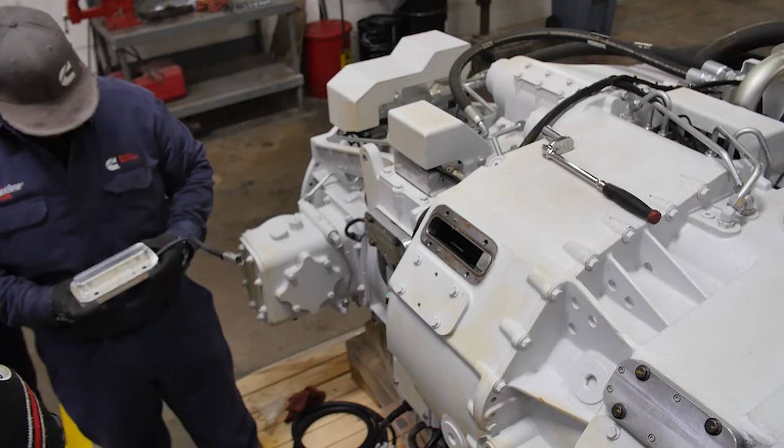So you see, obviously that's sealed with an O-ring, not a gasket. If you're going to go out and suspect you'll be doing something with these position sensors, take an O-ring with you. Those tend to swell up after a while, and then you never get them back in. You'll notice they are doweled, so they'll only go in one way - you can't get them in there backwards.

And that is one thing you can do to test a sensor. You can have it plugged in right here, and if you have a magnet, just run it up and down like that, and you'll see it moving.

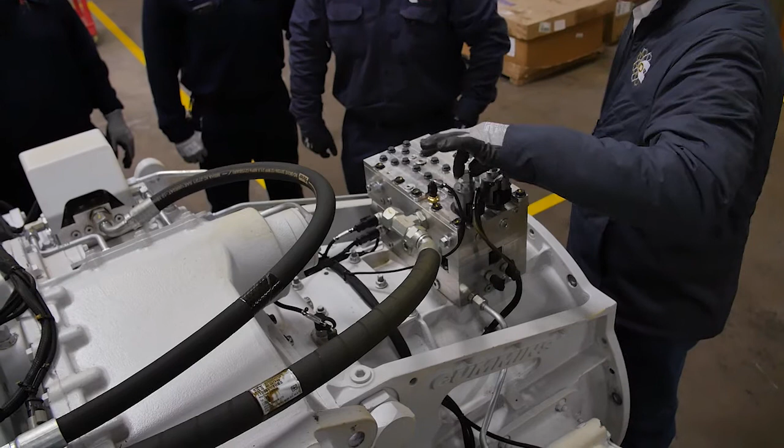I wanted to show you guys something real quick on these pressure control valves. These little nuts that hold these things on are really sensitive to torque - if you tighten these up really tight, the valve won't work correctly. So there is a torque spec. If you have an issue with a clutch valve that's not working, that might be one thing to check - is it one of these components, or some fat hand in there with a hammer tightening it up?

Okay, so next we'll pop this clutch inspection cover plate off and take a look at the clutch. I'll show you how to check that out.

Just looked at it. It's kind of a letdown, isn't it? You guys are ready to start swinging on things.

So we're looking at the clutch drum, right? This is your K1 clutch, the big one, the outside. And these are your K1 clutch discs. You can just see those around, and you can just move those. There is a specification and a tool.

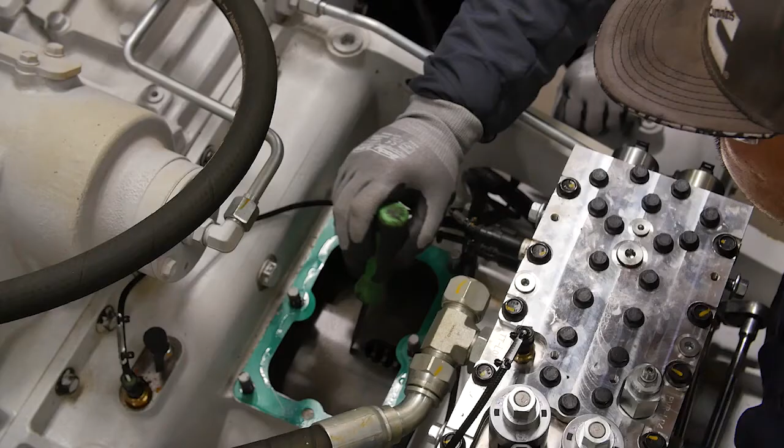It's just a piece of metal that we shove down in there to measure that distance. Is it go, no go? Yep, go, no go. And this is normal, this is what you ought to see. This is perfect. After a while, after some heat, they're not going to move around so much, but you should always be able to move them around. And if you ever get ones that are just absolutely stuck, you can't get those to move, your clutch is cooked.

The other thing that you'll see is these, they'll go from this nice little gray to black or blue, red, and all that stuff. Especially this inner drum, this is your K2, right? So this is the one that we start on. This is the one in starting where you get all the slipping.

But in order to inspect that K2 clutch, you're going to have to turn it. It'll turn pretty easy right at first, and it's luck of the draw, because both clutches are turning at the same time. But when it's installed, and this isn't going to turn because it's coupled into the engine, then you have a little better luck of getting the two clutches to turn independently. But that's all you have to do is keep turning until you get a window.

And then once you get that window come up, you can get the other clutch drum in through that window. Same thing we're going to look for is if you can move those clutch discs in and out. And again, if you're looking for signs of heat, it should look nice and gray like that. Shouldn't be black or red or purple.

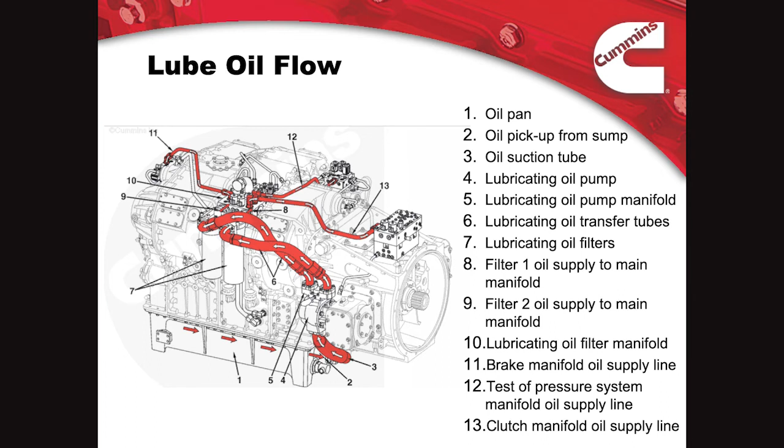Again, it's going to go through all these manifolds, it's going to split up a hundred thousand different ways. It's a mess, it's a lot to look at.

All the steel tubes that we looked at on the outside, that's your actuation lines, you see those. Lubricating oil flow is all internal through drillings. Clutch manifold, high volume, lots of oil goes through there. A lot of oil is needed to actuate those clutches and to cool those clutches. And then it also is the oil supply for the PTO gears.

So that's the gears inside the PTO pods. Remember that the actual drives themselves, it's dry. There's no oil out to the drives. Tops manifold, cooling oil. So this is oil that's going out inside the transmission and spraying oil on the gears inside, cooling oil. Handful of those outside too.

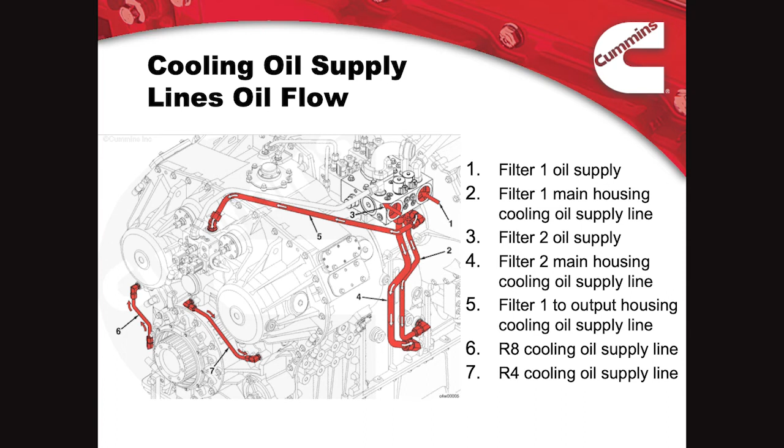Holding brake. So next we'll talk about normal operating parameters, procedures, things that you're going to see. Main system pressure, again, 500 to 600 psi, depending on the temperature of the oil and what it's doing. Lube oil, 6 to 12 at idle, 45 to 55 at rated speed.

Transmission temperature, these transmissions run a lot cooler than the competitive transmissions. There's no torque converter. There's none of that grinding and slipping that goes on in a regular automatic. So your normal transmission temperature will be 150, 160 degrees. Doesn't need near the oil cooler that the other transmissions do.

Operating techniques, this is for the operators out there. This transmission is different than the other ones. There's no starting out in fourth gear, there's no going from first gear to fifth gear. Everything has to happen sequentially. So if we want to start out, we have to start out in first gear, and then we have to shift first, second, third, fourth, all the way up to whatever we want.

So even if the operator selects fourth gear and throttles up, it's going to go to first gear, and then it's going to shift its way up until it gets to fourth gear. If he just selects fourth, it'll do that by himself, or he can sit there and push buttons all day long if he wants to. Same thing with shifting down, it has to sequentially come from fourth gear down to first gear if they want to go down that way.

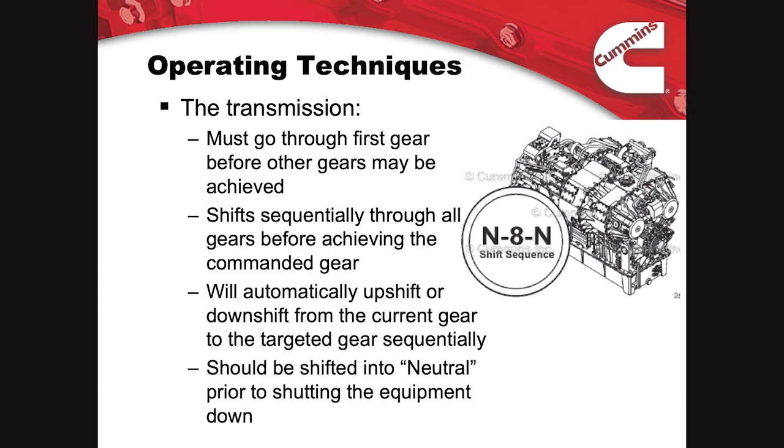We have a sheet right now that says at a certain well pressure, we need a certain RPM to engage the clutches, but it'll probably change next week or the week after as we get more tuning. So there is no neutral, okay? The transmission doesn't shift to neutral. We just release the clutches.

Again, if it shuts down when it's in gear, it's going to stay in the gear that it was in when it shut down. And another thing, if it's been sitting for a long time, or if you do some kind of service and you have lines off, even if you do an oil change and you have a chance of getting air into the system, it's a good thing.

Start it up and just bump it through the gears. Make sure you push all the air out of everything. Do that a couple times. Once you see everything's working fine, you can let it go back to service.

Again, go to neutral. If you've got your computer there, make sure everything goes back to home, minus 97 and 97.

Okay, maintenance stuff. It uses the same oil as you use in the engine, 1540 diesel oil. Pumpco is using 30 weight transmission oil. They're the only ones, and that's all done under an agreement.

We're doing weekly oil samples. Right now, we don't know how it's going to work or if it's going to work. So just a rule of thumb, it's 1540 engine oil for everybody else.

40 gallons, 65 gallons fill capacity. Oil level, checking oil level.

So there's no dipstick. There is the electric deal, you can watch it. But obviously the good way is with the sight glass. Quick and easy. With the engine running at idle, the oil level should be at about the parting line where the oil pan bolts up to the transmission, to the gearbox.

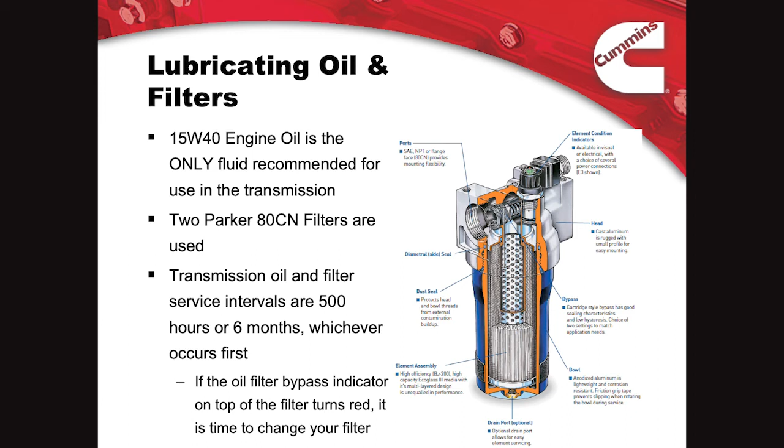We have seen on a few of them at fairly low hours start to give us oil pressure calls. It's because these filters were plugged up. Not sure yet if that's trash in the transmission or trash in the oil. And all the oil goes through those filters, so if I was going to go out on one of these, I'd carry a handful of filters with me. We're going to see a lot of filter plugging, I think.

All right, 2 breathers on the side of the transmission, we saw those. That's a maintenance item, change them every 6 months. Pretty much the only thing we notice is that those start to get plugged up. You'll start seeing the oil show low in the sight glass. It's because the transmission can't vent. Take those vents off, or take the oil fill cap off, and the oil comes right up. So every 6 months, change those.

Okay, so now we'll start talking about the putty, the fun stuff. So to talk to it, that's the cable you need. You saw it out there. That's the part number. We have those in stock in Arlington.

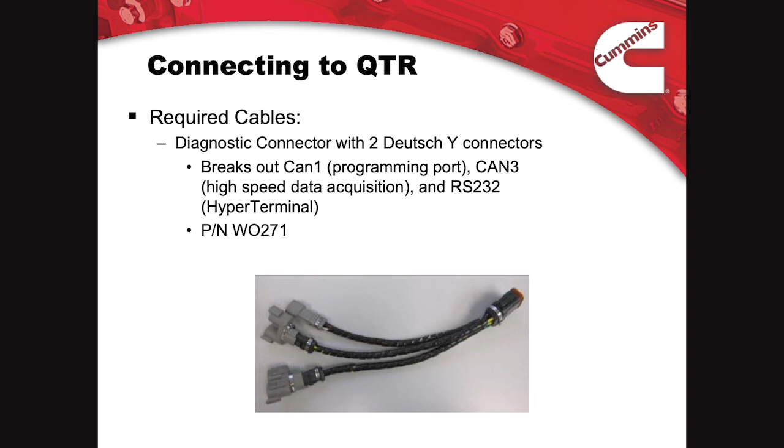I think it's $80. And like I said, Wayland's got a couple of them, but you guys ought to probably each get you one and keep it with you. So that way we can roll you out at midnight.

Connector location, we saw that on that front cover plate there, the bottom one where I'm plugged into it. That's where the harness plugs into it, or the rig harness. And then the cable that hangs down, that's the diagnostic.

To go to a screen, whichever one you want to look at, if you want to look at fault codes, you're going to push number 4, hit enter, and that'll take you to the fault screen. So the first screen is inputs, outputs, 1.

Here's all your pressures that we were talking about: clutch pressure, clutch 1 and 2 pressure, oil level transducer, 100%, it's full of oil, lube oil pressure before the filter, lube oil pressure after the filter, temperature before and after the clutch, sump temperature. Here's all your shift fork position sensors.

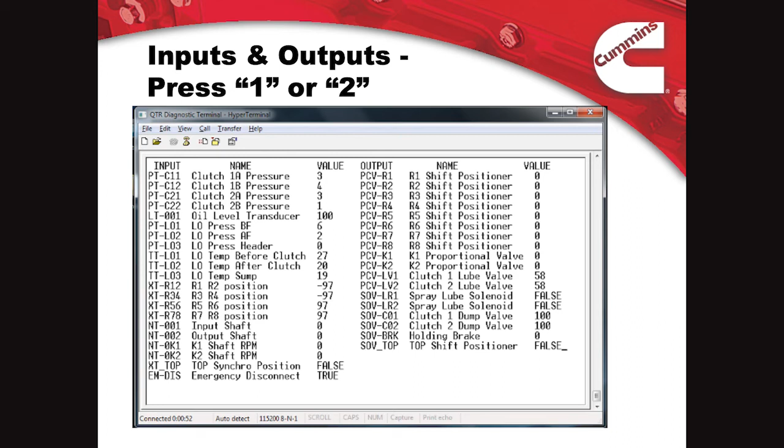What gear is this transmission in right now? Home position. If it was commanded in neutral, it would be in that position. The clutch is released, ready for first gear. Input shaft speed, output shaft speed, clutch speed.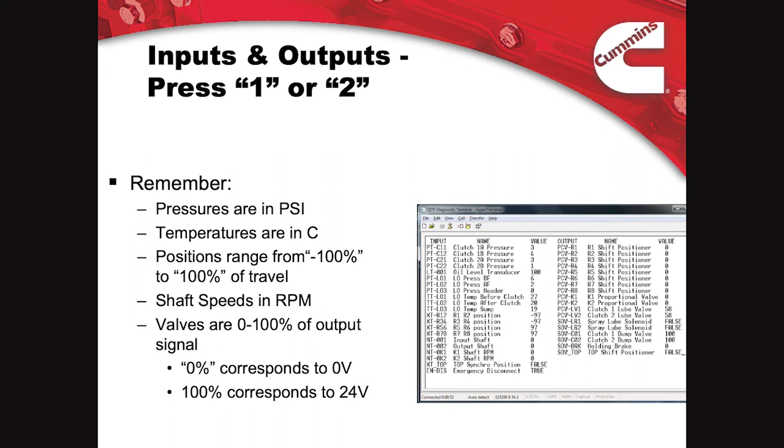Probably what you're going to look at the most on this is shift fork position sensors. Transmission won't go into gear, you're going to go here, you're going to see R7, R8 floating around at 50 or 0 or whatever, because they tried to go in tops and it wouldn't go home after that. Everything's in PSI, temperatures are in Celsius, 100 to minus 100, we talked about that.

All right, screen 4 is the fault screen. When you first go to the fault screen, these are going to be your active alarms. The faults come up as SPNs and FMIs. There are Cummins fault numbers associated with these, but this doesn't show them. This will show you the SPN, the FMI, and then a description. There's no timestamp, none of that. It's just going to be a fault, what the fault is, and a description.

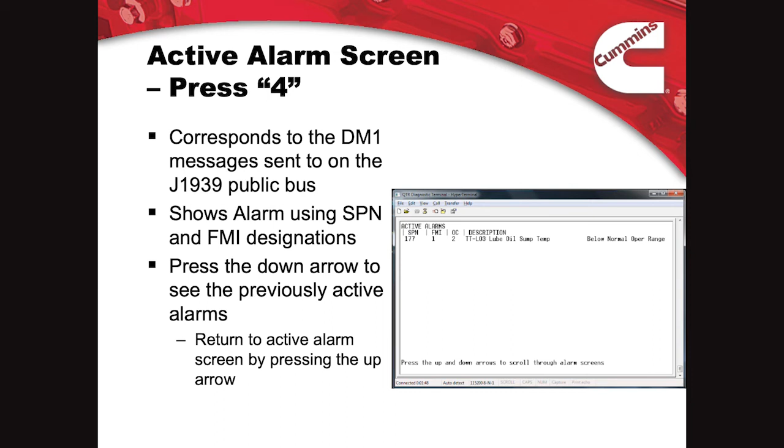So using your arrow down key, if you arrow down, you go through all those active fault codes all the way to the bottom, arrow down, and that'll take you to the inactive faults. Inactive faults, we can't get rid of them. They're there forever, and again, there's no timestamp on inactives either. It may or may not be useful to look at that, because you're going to go into inactive, you might see a fault that's 2,000 hours old and you wouldn't know.

Test screen. This is one of those screens. I don't even know if I should do this, but don't use this screen. Only use this if someone from my team or someone from engineering is telling you to try this with this screen, because if you do the wrong thing in this screen, you can cage the transmission, tear things up. So literally what you're going to do on this screen is R1, R2.

If you go in here to where it's 0 and you tell it 0, and then you hit enter, well, it's at minus 97, it's going to move it to 0, which is its position. Or you can tell it to go 97, which is all the way to the other way, which is all fine.

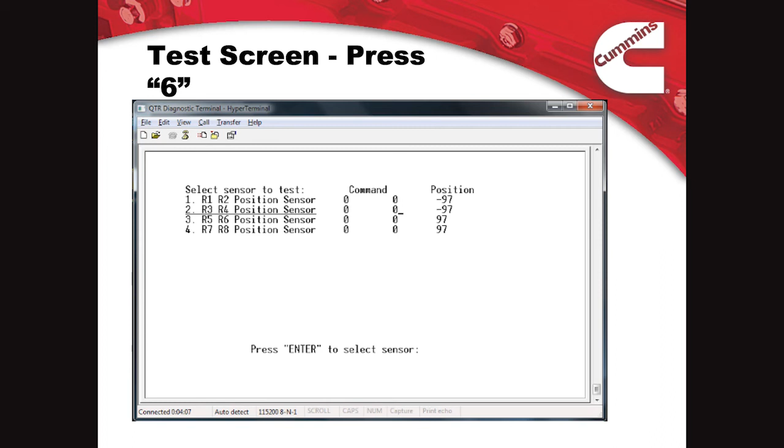But if you got something hanging up, like that ProFrac one the other day, the fork was hung up, if you tried to move this, you're actually shifting gears when it's not supposed to, and things will clunk and grind. And you can move things around in here and cause problems, so unless somebody tells you to do something here, don't do it. Oh look, it even says that.

Okay, calibration screen. You'll use this one a lot. If you go out to one and you have a shift fork position sensor that is reading something stupid, sometimes you'll see them minus 31,658, and usually that means the sensor's trash. But we always want to try to calibrate it first, see if we can bring it into range, see if that'll fix it.

Also, if you put a new sensor in, you have to calibrate it. So you just go to this screen and using the arrow down key, you arrow down until you underline whichever one you want to calibrate, then push enter. When you push enter, it'll say it's calibrating A, and then you'll actually see it move.

It'll start moving the shift fork, and you'll see it move all the way down to 100, and then settle at 97. Then it'll go to B, and command it back the other way. So it'll stroke it all the way one way, and all the way back the other way, and that calibrates it. If it ends at 97, minus 97, you're good to go, you fixed it. Transmission has to be running, obviously, to do this. Everything's hydraulic. This screen, you'll use a lot.

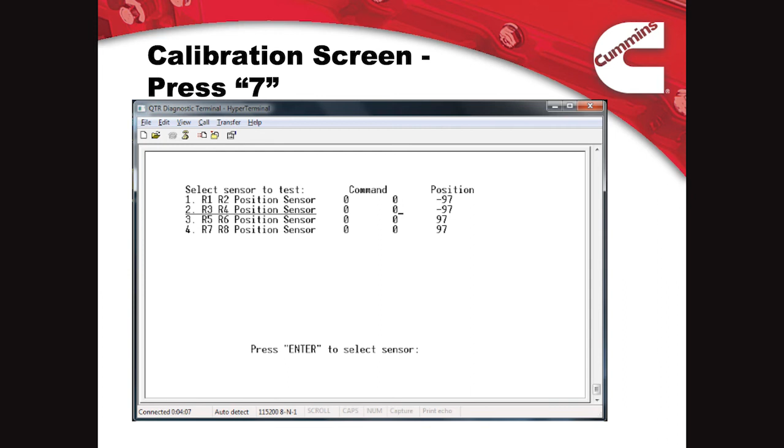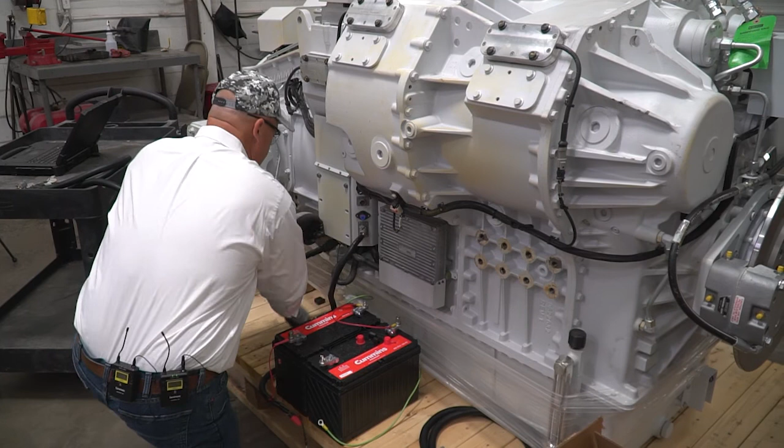All right, so let me show you guys a couple things about connections real quick before we do this, and then we'll hook the batteries up and connect the laptop to it. So inside here, remember this is our customer connection, right?

So there's a ground bar in here. This ground is critical. This needs to be grounded, preferably straight to the batteries. But if not, it needs to be a good chassis ground. So if you do have a connection problem, check this ground. And it's an OEM connection.

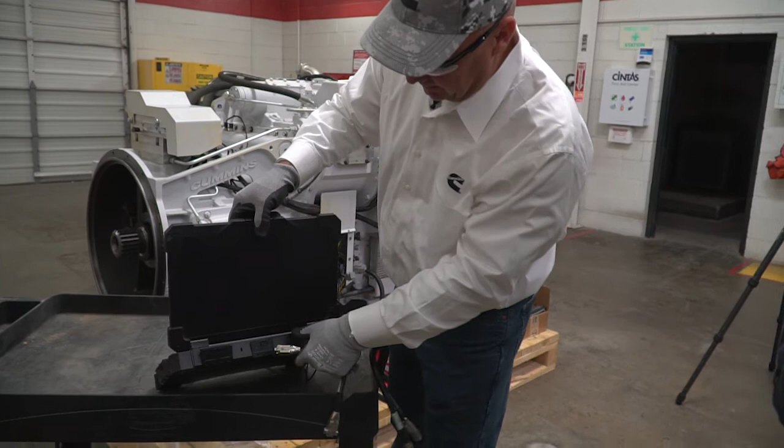Several connectors on here. The one we want to use is the RS-232 connector. None of these other ones will work. And the way we're going to set up these laptops is to work on this port right here, the one closest to the charger port. That is the COM1 port. So it's just as simple as plugging that in.

If you've got a little pocket screwdriver, that's the best thing to do. Oh, look at that, I knew somebody would have one. Okay, so I've got the PuTTY program set up on my taskbar, and it just pops up.

So part of what we're going to do is set up all the parameters in your computer just right and load it as a session. So when you go in, you click on the session you want to use - we have this one, it's called QTR - and then hit the load button. Now that sets the tool up the way it needs to talk to this transmission. Then you push open, then push backspace, and look at that, it worked. So once you push backspace, now you're connected to it.

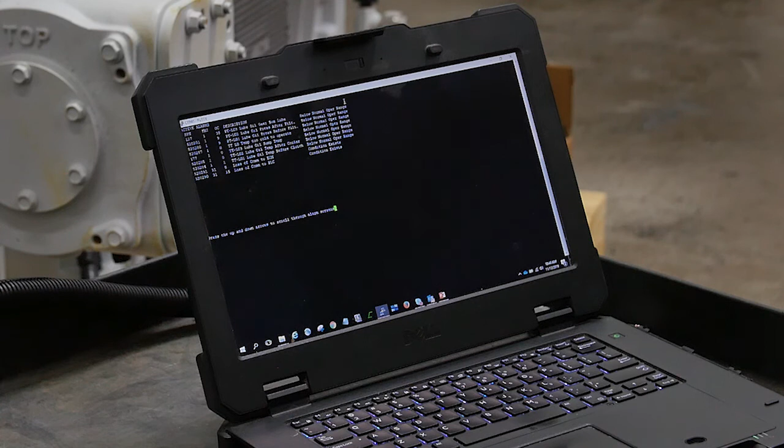And then again, whatever you want to look at - like we want to look at fault codes, that's screen 4 - push 4. And now here's all the fault codes that we have. These fault codes are active right now, and if you look at them, these are all temperature faults and a pressure fault.

There are several faults that come active with cold oil. It does show on the screen, in the data van it shows as a fault code. It doesn't show warm-up mode, it'll show a fault code. So a lot of times the operators think there's a problem.

So we'll get a lot of false calls? You get a lot of false calls. So the one thing is ask them, what fault code are you seeing? Because I've had them call me and say, hey, I got an oil pressure fault. Oh, you do? Well, tell me what fault it is, and they'll read it off. No, that's oil temperature - let it run. There is a warm-up mode.

The transmission, when it goes into warm-up mode, needs to see zero shaft speed. So you might have to set the brake if you've got a little bit of drag. Set the brake, it's going to automatically go into warm-up mode. What it does to go into warm-up mode is it cages the transmission, throttles the engine up to about 800 RPM, and then starts kind of pumping the clutches, dragging the clutches just a little bit. Friction on the clutches heats the oil up, and it keeps doing that until it gets the oil up to about 86 degrees, and then it's ready to go. So that's what we need to see, 86 Fahrenheit oil temperature to run.

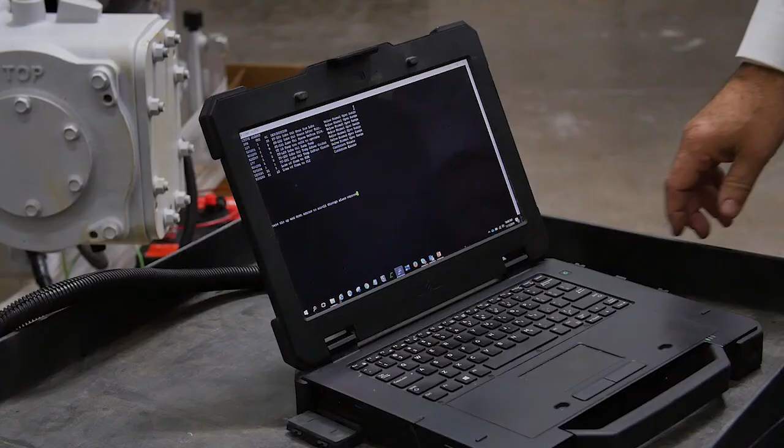Arrow down, previously active - so there's all the fault codes that this thing has had on it. Again, this is some of what I did yesterday, going around unplugging sensors and making things happen. So your field hands are going to do that to you.

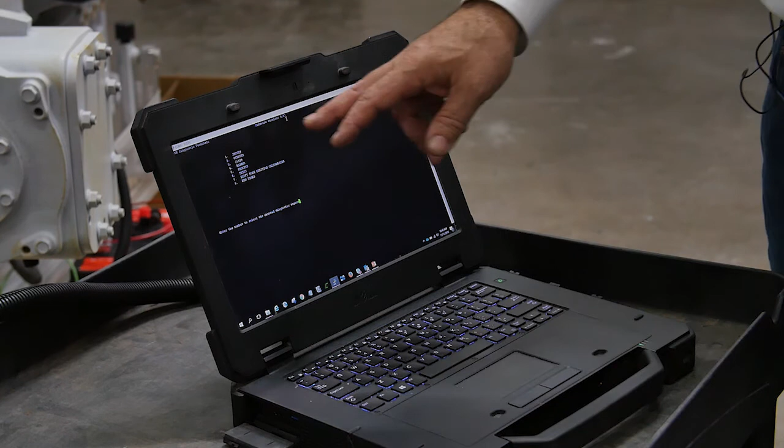Backspace to get back home. Screen 1. Here's all your inputs and outputs, here's everything doing. There's your shift forks at 97 and minus 97. Shaft speeds at 0.

So if this thing was running right now, with those position sensors in that position that they were in, and your clutch 1A pressure was 500 psi, you should be in first gear. You should have output shaft. If your clutch pressures are both at 1 or 0 or whatever, you're in neutral. It does have

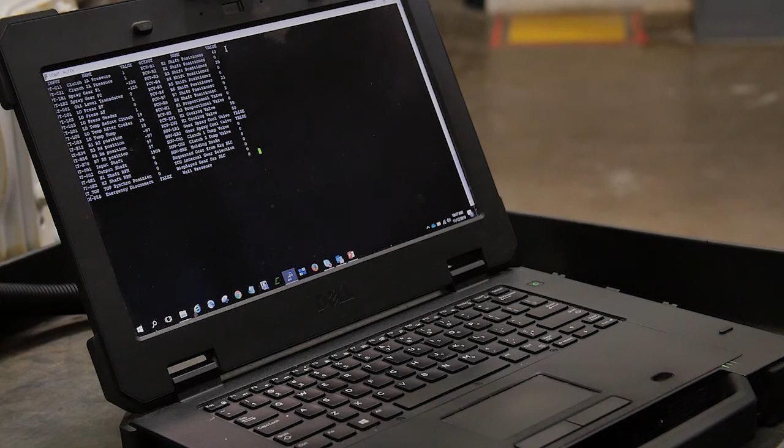a reading to show you what gear is requested and what gear it actually is. And that will show 1 gear more than it is. So when it's in first gear, this will show 2. And there's a reason for that I'll tell you when we're offline - because there's a secret gear.

Again, the data link, you'll never use that. Shift fork position sensor calibration - that's the one that you're going to use a lot. Just push 7, you can see it's underlined, so that's the one that you want to select, or that's the one that you're going to calibrate right there. If that's not the one, you just arrow down till you get to the one that you want to calibrate.

And then once you get there, you just press enter, and then it does it all by itself. And then once it's done, it says done. Okay? And then the other thing, which is run times - you saw that it's no different here than it was there. That's another good one to look at.

That's it. There is no, do you want to disconnect or any of that kind of stuff when you're done? Unplug it, turn it off, whatever. It doesn't care, the TCM doesn't care. The laptop doesn't care. But if you want to do it proper, you push OK and do that.

Is there a way to save an image? You just gotta screenshot it. Oh, there is - yeah, that's the image saver right there.

Little troubleshooting and diagnostics, okay. 19 sensors and actuators, 1 control module. But again, all the actuators, all the sensors and everything, the harness is tagged with what that sensor is, and the housing is stamped with what that sensor is. So pretty easy to find.

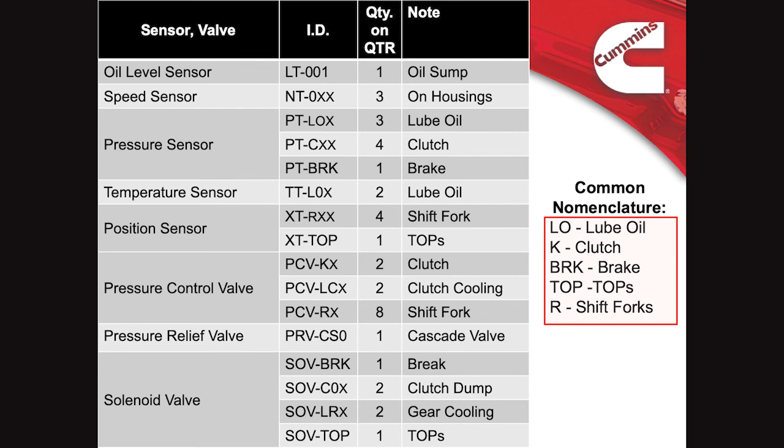Okay, we went through this on the computer, we'll go through this again once we get your computer started up. Faults are the same on this as they are like on an engine - if you unplug a sensor, it'll say shorted low, right? Same as an engine, shorted high, shorted low, all that stuff. So the troubleshooting that you use on an engine, you can use it on this.

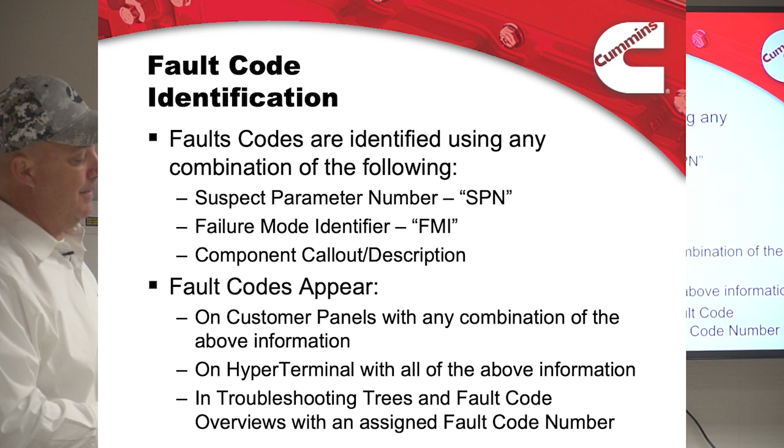SPNs, FMIs, there is a conversion. Every fault code on here, most every fault code on this transmission has a corresponding Cummins fault code. So you can go into QuickServe, put in a fault code like 8034, and get troubleshooting steps for this transmission - I'll show you that here in a bit. On QuickServe, it's going to show on this just like it does on an engine: a little diagram, what to do, what to check for it, code information, same thing. And then that's that - that's the end of the presentation.